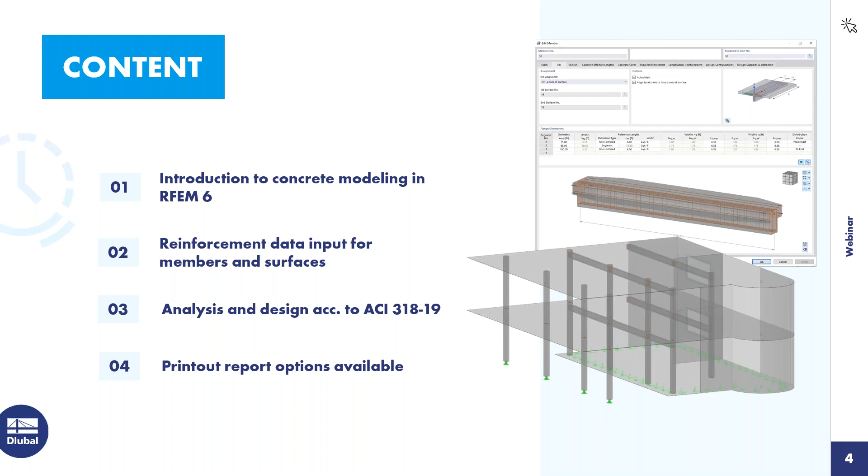As far as the content over the next hour today, we're going to move through a couple of examples, working in our new FEA program, RFEM 6, as well as utilizing the concrete design add-on. I'll give you a quick introduction to concrete modeling within our program. We'll take a look at reinforcement data input for both members and surfaces. We will be running an analysis and of course design according to the ACI 318. Finally, at the end, I'll show you a few printout report options available within the new program.

So we'll actually begin immediately within RFEM with our first example. When we begin a new file, we want to give it a model name. The type of model is set to 3D.

On the second tab, you'll notice all of our add-ons. These add-ons would only be available if you've purchased them, and today we'll be focusing on the concrete design. You can see I've activated it here.

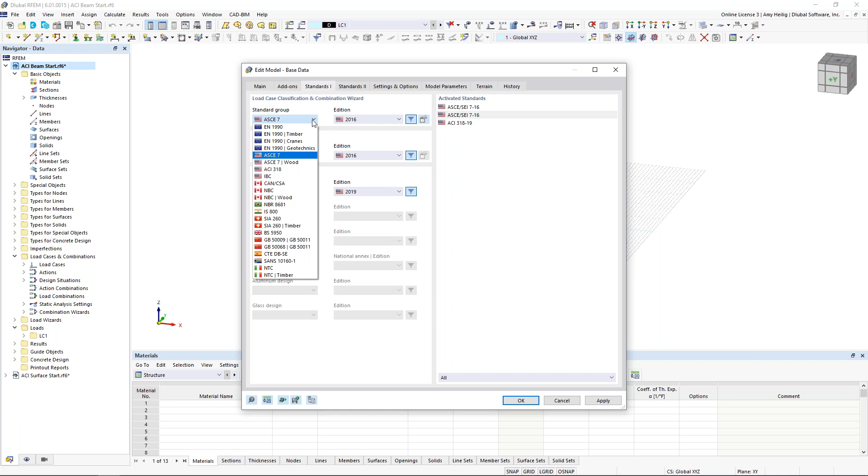Under the third tab, standards, this is where we can select the relevant concrete standard since we've activated that add-on. Today we'll be working with the ACI 318, but you can see the Canadian standard, the Eurocode, and other international standards are available. As far as our load cases and combinations, we'll be working with the ASCE 7, but of course we can use our drop-down to select a different standard there.

Finally, under the settings and options, this is where I can orient my global and local axes. You can see I've set both of these Z axes to upward for the model here.

Once we are done defining this basic information, we are brought into the main program RFEM here. We want to start off with our drawing grid, which we can right click at the grid down at the bottom to edit. You can see that I have my grid point spacing set at 1 foot. If you have anything else here, you can either reset it or choose this option, default, which will move it back to 1 foot spacing.

We want to begin by defining a new material here. So we will right click within our navigator under the material to create a new material. This will bring open our dialog box within the program.

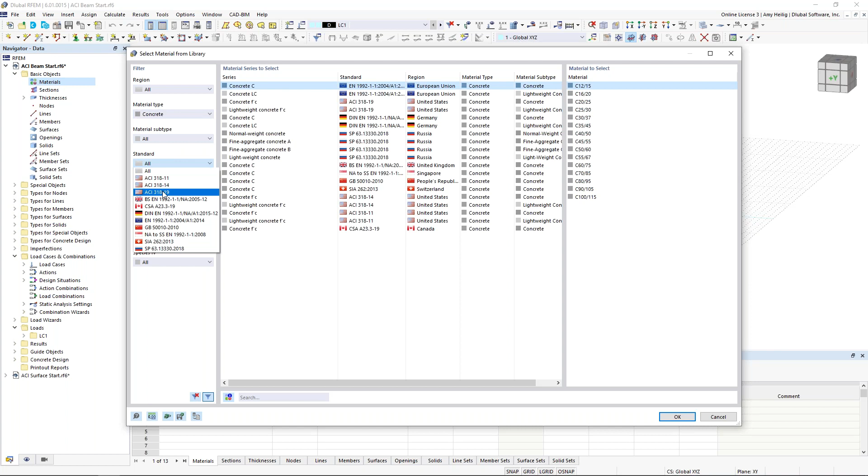We can then access our material database and take advantage of the filters over on the left. Within my drop down, I can choose concrete, select the standard ACI 318 2019, and from here choose my 4000 PSI concrete.

Notice on the second tab here with this concrete material, we also have the settings for creep and shrinkage. This comes into play a little bit later on with the serviceability design for long-term deflection if we wanted to consider that. We'll go ahead and leave this unchecked for our example today.

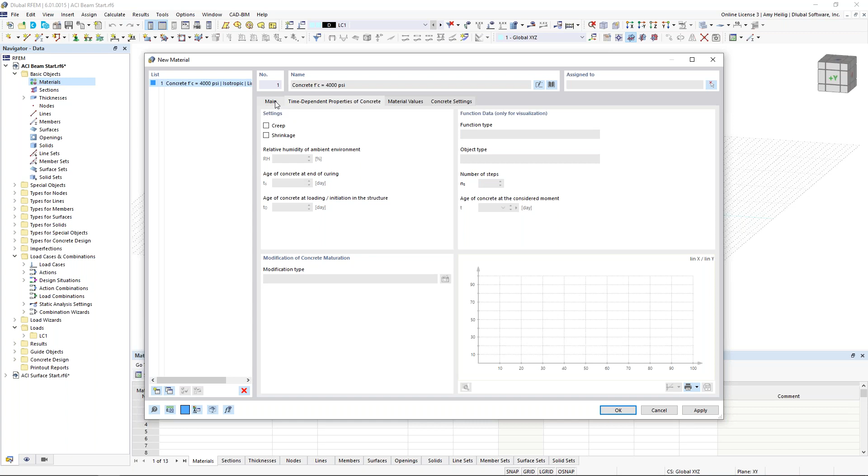Now, while we're still in this dialog box, we want to create a second material. So we once again visit our material database, and over on the left, we use our filters to reinforcing steel. Again selecting the ACI 318, we can now choose grade 60. This is a little bit different in RFEM 6 than what we saw previously in RFEM 5, where we do want to go ahead and define that reinforcing material here for our concrete elements.

Once those materials are defined, we'll see them over here within the navigator tree. Now we want to do the same thing for our first cross section.

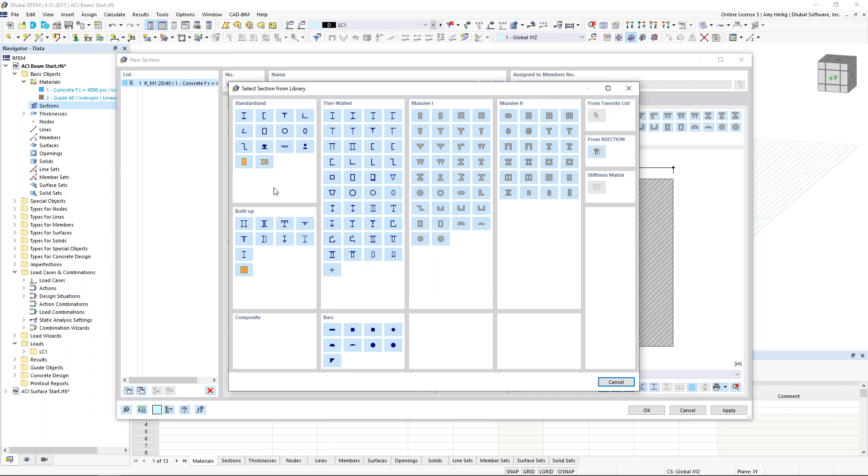So I can right click on the section here and choose new section. We'll see some of the various massive shapes available to us on the right. We can always visit our database to choose from the library the various thin-walled and massive cross sections. We also have all of the available sections from the steel standards, aluminum, and so on.

But sticking with this basic rectangular section, under the second tab here is where we can go ahead and modify these dimensions at 12 by 18. The third tab will calculate all of the cross-section properties for us automatically.

So we click OK, and now this section is available to us, and we want to begin by drawing our first member. I can go up here to my toolbar to draw a new single member. What you'll see here is the member type is set to beam. Now notice the design properties is automatically checked on here.

This is all related to that concrete design add-on that we activated within the base data. When we have this unchecked, notice all of these tabs disappear up here at the top related to our reinforcement. We will only perform an analysis if this option is not checked. But of course, we're also interested in the design portion for our example today, so we'll go ahead and leave this turned on.

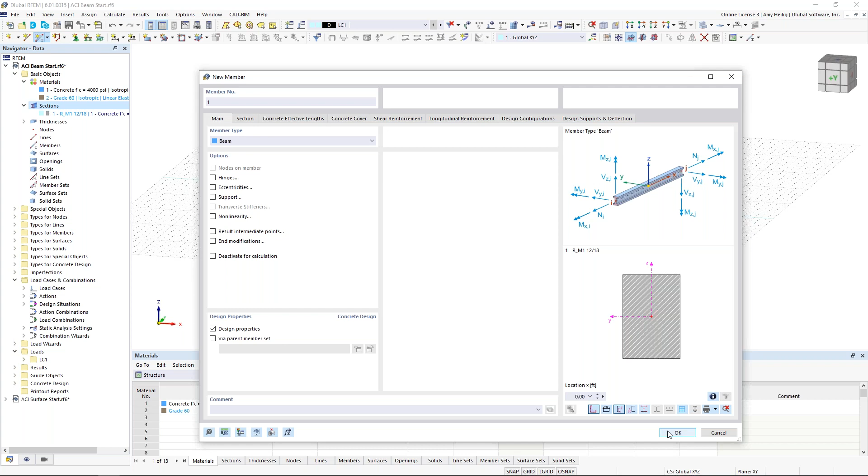We'll get back to some of these various tabs here in just a minute, but starting with the basic geometry, I'm going to snap from my point 0,0,0, and my second point will be at 26,0,0. So we have our first beam element shown here.

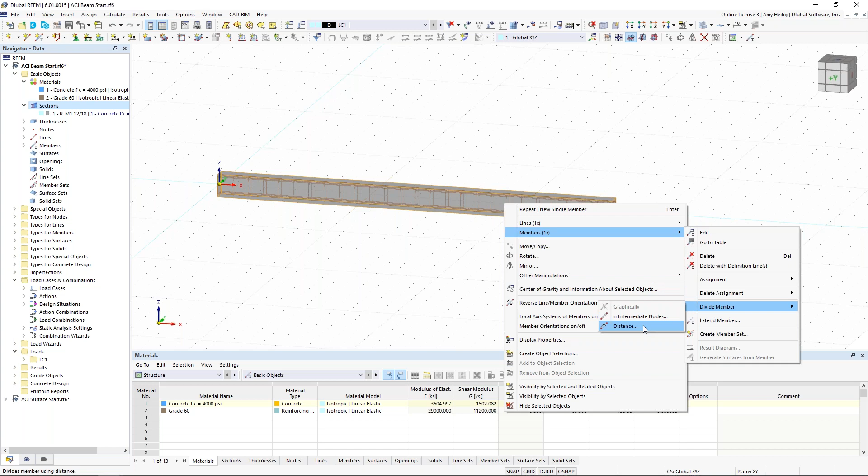Now I want to add a node along the member length here. So I'll right click on the member, and under members we have the option to divide the member by a distance. Within this dialog box, I can tell the program to go ahead and place that intermediate node 20 feet from the member start. But rather than dividing the member itself, I can choose this option to actually create the node without dividing it, so it will remain one continuous segment.

I click OK. I can turn this into wireframe view, maybe turn off my grid. I can zoom in here and you'll see this node added along the member length.

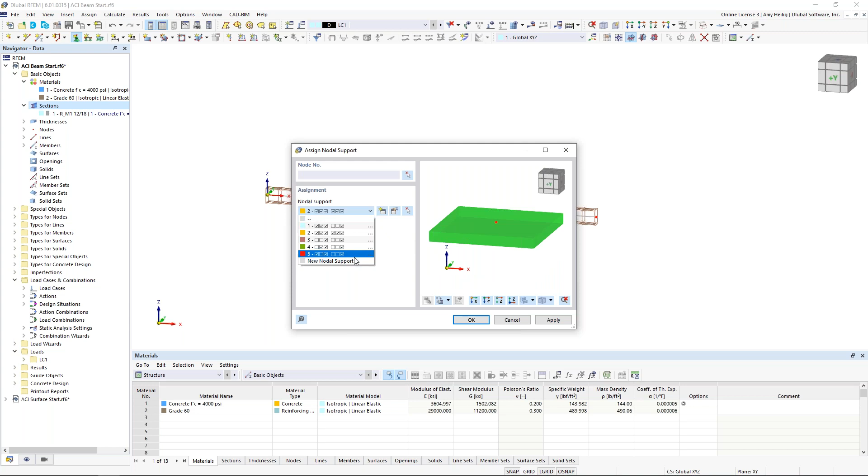So let us continue on by supporting this simple beam. We'll go up to draw a new nodal support. We have some default options within the program here, such as a typical pin support, maybe a typical rigid. We can also create a new support definition. Within this dialog box, we have our 6 degrees of freedom, 3 in translation, 3 in rotation.

Now we also have partial fixity. So if we have something that's not fully fixed, not fully released, we can go ahead and define that spring constant there. And lastly, because RFEM is a nonlinear program, we can define these geometric nonlinearities for the nodal supports within our third drop-down box here.

For our first nodal support, we want to restrain the rotation about the global x-axis, which I can see back here in the background. I click OK for that first definition type, and then I can graphically select my node here, node number 1. Now notice I'm still within this dialog box. I can click Apply and create a new nodal definition once more.

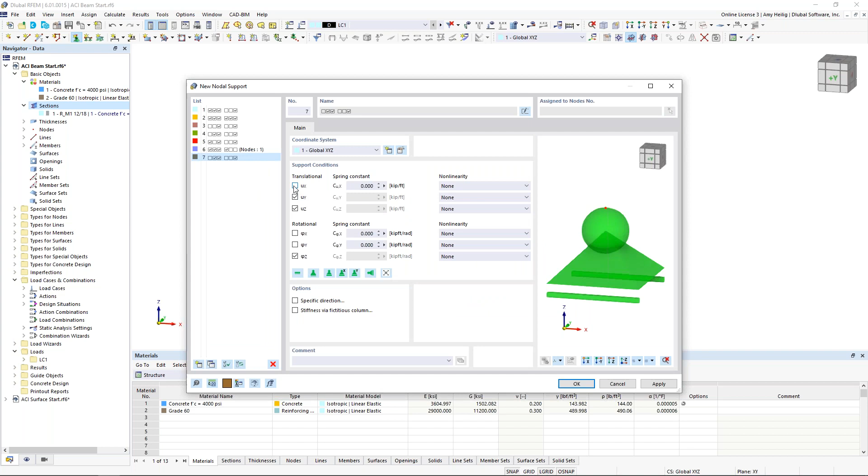This time we're going to release the translation in the global x direction for a roller. I click OK. I can graphically select my intermediate node here, and I click OK once again, and now our nodal supports are shown here at both these nodes.

Now, something new that we've added within RFEM 6, you can always right-click at one of these nodes and take advantage of this slider option to increase or decrease the size of those nodal supports.

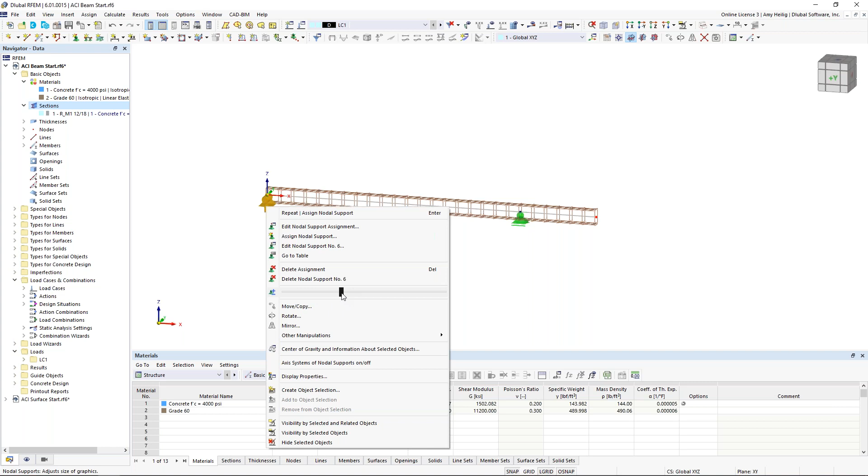Okay, so now that we have the basic geometry defined, let us move on to loading. Notice the program has already created one default load case here. So if we go into this option, Edit Active Load Case, we can go ahead and rename the load case dead. Now the self-weight is automatically activated here. The action category is set according to the ASCE 7 to dead load.

So for our second load case, we will create this as live 1. The action category will be set to live. The self-weight will be automatically unchecked here because we don't want to account for it twice.

And finally, for my third load case, I'll make a copy and simply rename this one Live 2. So now that all 3 of our load cases are defined, I want to take a step back here.

Under the first tab, Base, we will generate those load combinations automatically according to ASCE 7. This is what we set under our base data, but we can go ahead and make a change to a different standard here. I also like to activate this option, the combination names according to the action category.

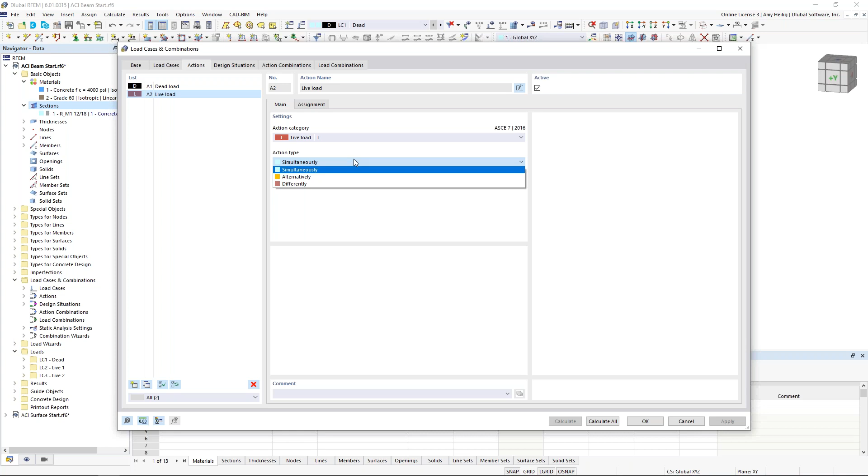Under the actions, we have both dead load and live load defined. Because we have 2 live loads under our load cases, we need to tell the program how to combine these within the load combinations, whether that's together, separately, or alternatively. We can choose those options from the drop-down box here.

Then we have our design situations, and this is new within RFEM 6. We have 2 design situations created, and these will be used for our concrete design. Notice we have LRFD for our factored load combinations and ASD for our unfactored load combinations. Both of them are active here for the concrete design add-on.

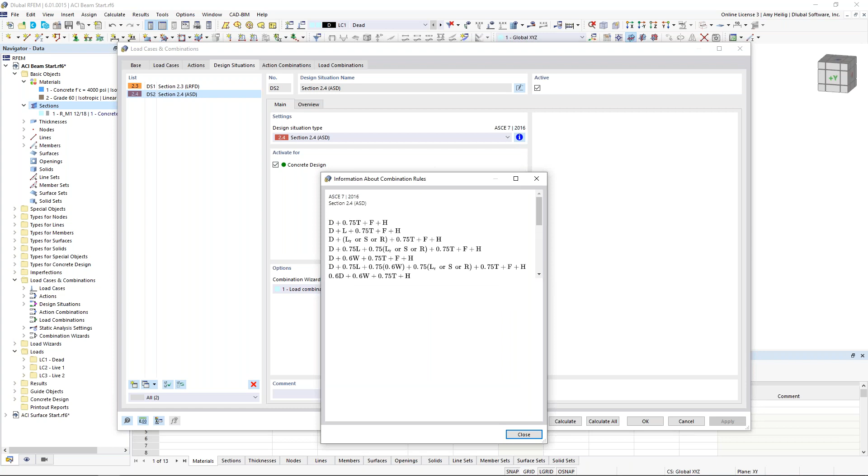Now, if we're curious to see what these load combinations look like, referencing the standard, we can click on this little info button here, and now we can see all of the load combinations in detail. But there's something we also need to take care of within this combination wizard that's important for concrete design.

For our factored load combinations, which will eventually be used for our strength limit state design, we know that we need to apply this I-crack factor that comes directly from the standard to reduce the stiffness. And that's all done here within the combination wizard.

So I can go to the edit settings here, and notice the static analysis settings is set to a second order analysis with P-delta considered, which is great. That's exactly what we're going to be utilizing today. But we also want to turn on this option down here to consider the structure modification.

Now I need to create a new structure modification. I'll activate this for members since I only have one member in my simple model. Within my tab that appears here, I need to use the drop-down box to create a new member stiffness modification. And sure enough, within this drop-down box, we see the ACI 318 Table 6.6.3.1.1(a) listed.

This is just going to reference the code to give you the I-crack factors for the various component types here. For today, we obviously have a beam. So the I-crack factor of 0.35 will be applied to the bending stiffness here.

I can click OK here, and then I'm going to want to either type in my member number or I can graphically select it. I click OK, and now for my factored load combinations, the I-crack factor will automatically be considered.

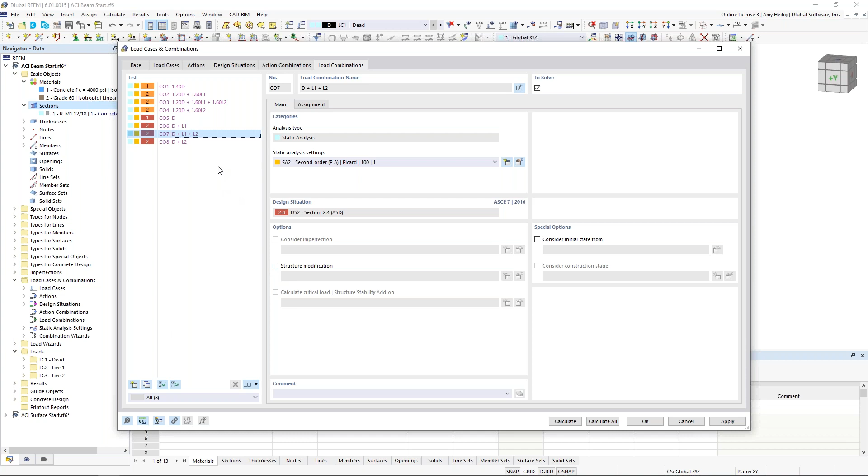So now that we have defined the load cases and combinations, we need to actually apply the load to the member. We'll start off with a new member load within our toolbar here. The program asks us which load case to place this member load under. We'll choose dead load, and up pops our dialog box where we can simply define the load magnitude of negative 1.0 kip per foot.

This load will be applied along the full length of the member. I can graphically choose this member or type in member number 1. I hit apply and next, and notice in the background that the load was applied, but I'm still within this dialog box.

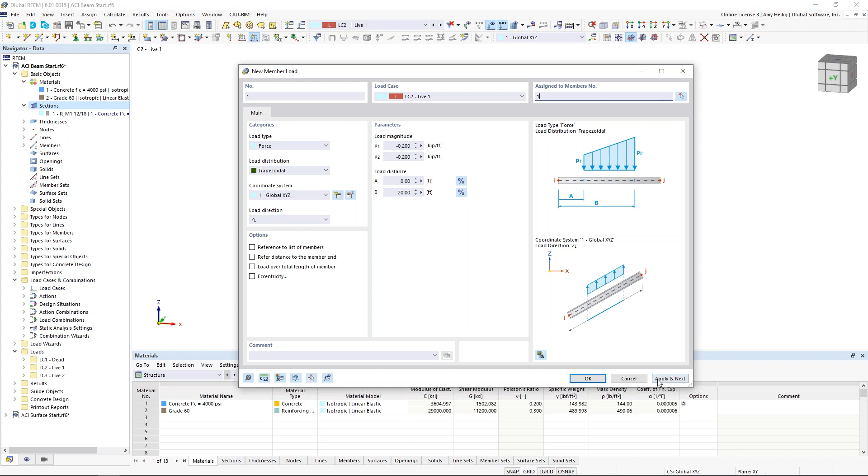This allows me to drop down to load case number 2. I'm going to change the load distribution here to trapezoidal, and adjust my load magnitude at the start to negative 0.2. The end will also be negative 0.2, but I want to apply this only from point 0 to 20 feet on my beam. I'll type in member number 1, apply and next, and in the background we should see that live load applied only between our 2 nodal supports.

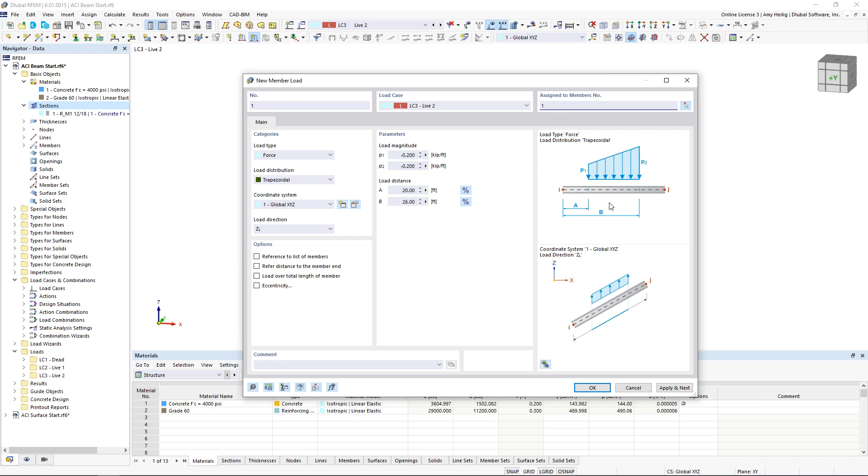Finally, we want to do the same thing with load case number 3. We'll leave the load magnitude the same, but adjust this to go from 20 feet to 26 feet. I'll hit member number 1 on the keyboard, click OK, and now we should see that additional live load defined here.

Now within my drop-down box, I have the ability to cycle through these different load cases and combinations to view the loads applied to my beam, also including the load factors from the ASCE 7.

Okay, so what we can do now is choose this LRFD design situation, and I can run a quick analysis. Remember, I haven't modified my reinforcement yet, so I'm not really doing the design according to the ACI quite yet. The program put in some default reinforcement to begin with.

Looking at just these static analysis results, notice we have a new tab here within our navigator, grayed out because it's the only thing we've solved for, but it says static analysis. We're probably not so interested in the global deformations for these factored load combinations, but what we can take a look at are topics like internal forces.

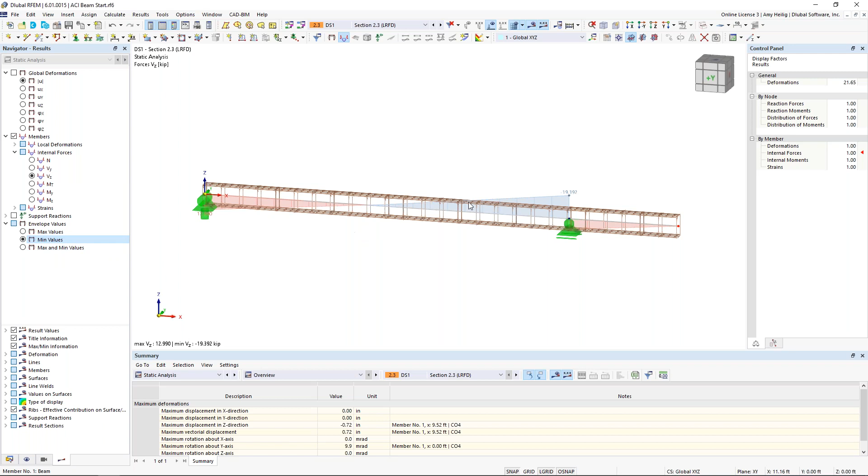You can think of these design situations as an envelope solution. It's going to group together all of those factored load combinations, and you'll see 2 different values for all of my internal forces - these just refer to the envelope values. Currently I'm viewing both the max and min, but I can set this to only the max or only the min, and we'll see that adjust here graphically.

We also can display, of course, the support reactions. Again, these are just the internal forces - this is probably what we'd want to use to do our design according to the ACI.

So moving on to that topic, let us double click on this member to explore these other tabs located up here at the top for our reinforcement definition. The first tab is the concrete effective lengths.

I'm not going to touch anything within this tab. The reason is because when we do not do anything within this tab, it's going to design the member according to a P-delta analysis. That is one of the approved methods within the ACI standard.

Now, alternatively, if I do define an effective length within this drop-down box, it will design according to the moment magnification method. Again, this is also from Chapter 6, an approved method. But we'll go ahead and design according to P-delta today. Under our concrete cover, we can leave this as 1.5 inches, which is default here.

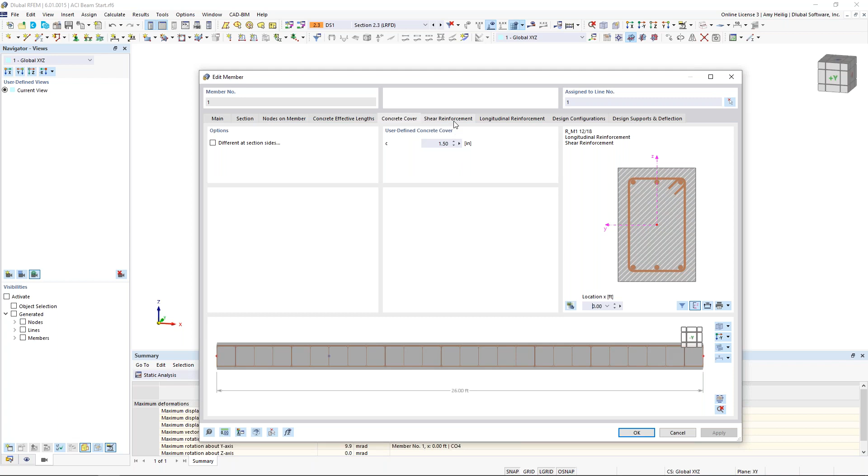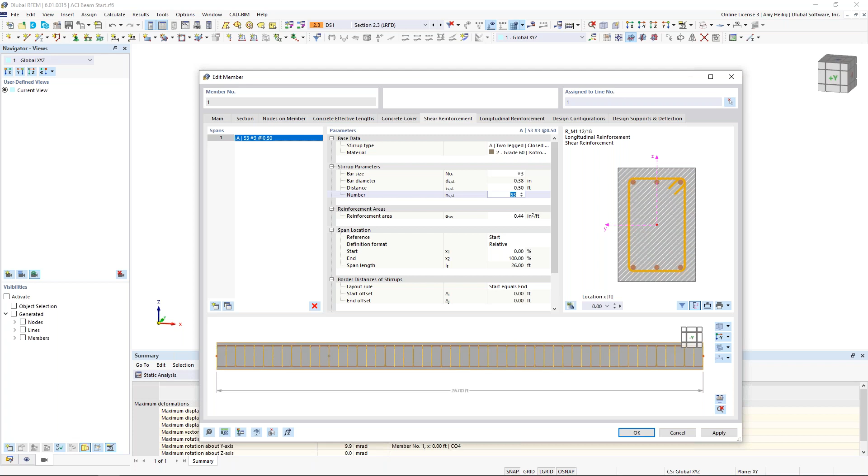Our shear reinforcement - this allows me to define different zones if I want along the member length. Notice I can create these different zones and adjust my shear reinforcement as needed. For our example today, we'll just go ahead and utilize these number 3s, but I'm going to modify my spacing at 0.5 feet, or every 6 inches. Notice this picture down here automatically updates with my shear reinforcement. This is applied along the full member length.

Under my longitudinal reinforcement, this is where I'm going to set the longitudinal reinforcement as shown over here in this graphic, this cross section. I can go ahead and use my drop-down box to choose unsymmetrical. This option gives me the ability to define 2 number 5 bars at the top of my beam - we can see that picture update here.

Along the sides, I'd like to define 1 number 4. Again, seeing those lateral bars here, go ahead and update in the picture.

And then finally, we want to update the bottom. We'll go ahead and choose 5 number 5s from my drop-down box here, and we see those 5 number 5s shown within the cross section. So this is going to be applied along the full length of the member here.

What else we can do is define a little bit more information such as reinforcement offset, but also anchorage type at the start and member end. This is all going to come into play for our development length design checks within the ACI, so we can make adjustments there. For now, I'll just leave this empty.

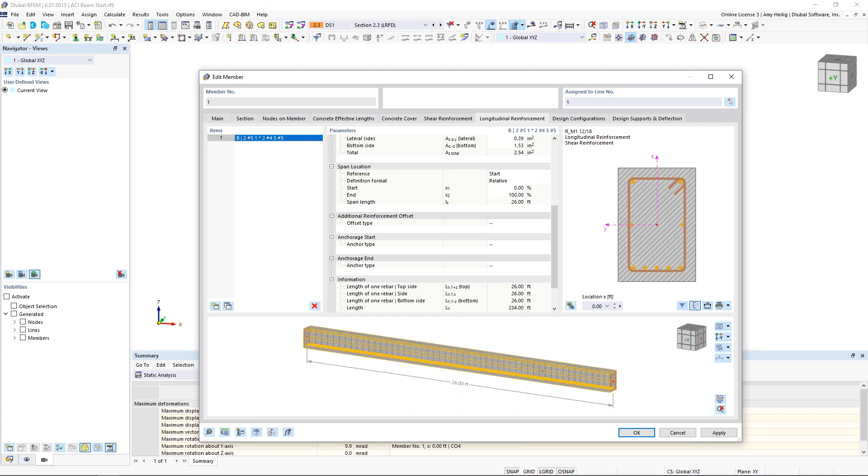Now, we of course have some additional positive bending moment in between these 2 supports. So perhaps this reinforcement isn't completely adequate, and we'd like to add some additional bottom reinforcement only at this location. So what we can do here is create a new item.

Up at the top, I'm going to choose from my drop-down box here the option D line. Then I'm going to choose 4 number 6s. Then I want to adjust my offset distance, which is all measured directly from the stirrup. We can go ahead and modify this at 0 and 1.7. And then for the right-hand side of this line reinforcement, it will be 0 and 1.7 again.

Okay, so now we see that additional reinforcement, but right now it's shown along the entire length of the member. I'm going to actually modify this to begin at 3 feet and end at 17 feet. And now we can see the reinforcement shown here, which will coincide in between the two nodal supports.

Now, similarly, we probably have a negative bending moment over this intermediate support here and into the cantilever portion. So we'd like to add some additional reinforcement for the top of our member. Let us once again define here the option D for line, and we're going to choose 2 number 5s.

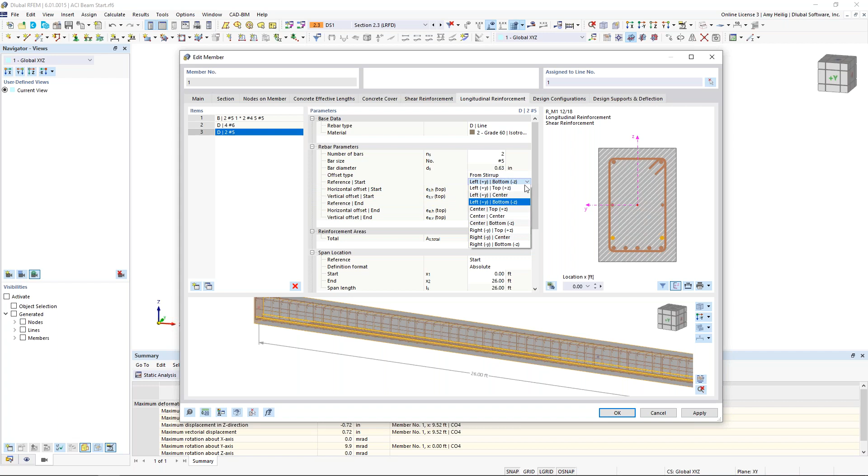Now, for this option with our offset distance, we want to use the drop-down box here to choose center, top, positive Z. Then I'm going to modify my offset distance to negative 1.2 and 0. I'm going to choose the same option here, center, top, positive Z, and this is going to be 1.2 and 0. So now we can see that additional reinforcement at the top shown here.

Now we don't want to run this along the entire member length. Rather, we are going to choose a distance here of 17 feet to 25.5. And now we have the additional top reinforcement defined over that intermediate support. So that will be all that's needed for this particular tab.

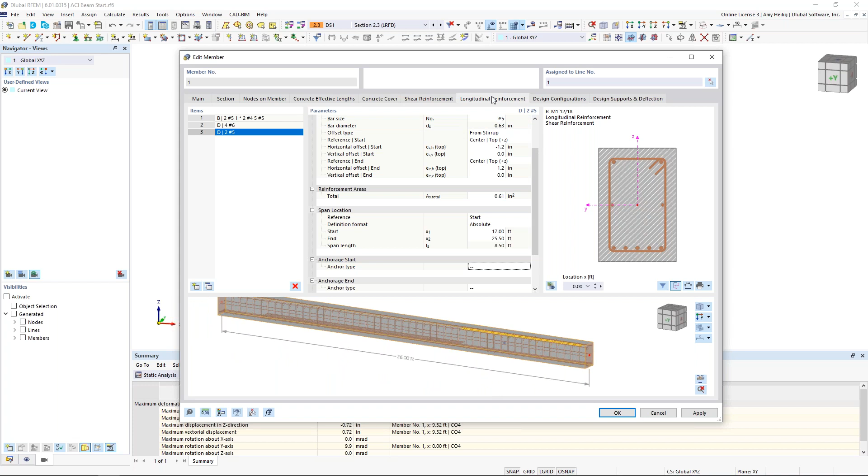So we'll move on to design configuration. We have strength configuration and serviceability, both with a default option. We can go ahead and edit the settings for this default. What you're going to see here are just the various options specifically for the ACI on what we can turn on and off for the strength limit state. For example, we have strength reduction factors, some minimums and maximums to consider directly from the standard. Now the stability tab here is related to the moment magnification method. We're not running that for today, so nothing to take care of here.

As far as the serviceability configurations, if we take a look at this, you'll notice initially we're going to be checking the crack analysis. So what this is going to allow us to do is take into consideration section 24.3.2 from the ACI to make sure that our spacing of our longitudinal reinforcement meets the code requirements.

Now, additionally, we can turn on the direct crack width calculation. This is a bit more of a theoretical approach. It will utilize the Gergely-Lutz equation to calculate the crack width. We can compare this to the reasonable crack widths set forth by the ACI PRC 224.

So directly from that standard, we have some different options here that allow us to choose our limiting crack width. For example, dry air protective membrane, we can set this to 0.016 inches. Some minimum longitudinal reinforcement due to shrinkage and temperature.

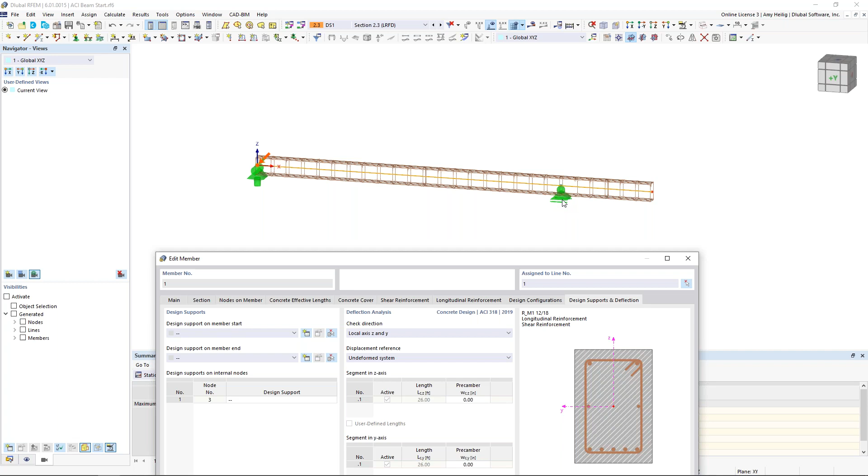Now the final tab is related to our design supports, and this is important for two different reasons. The first we'll start with is deflections. The program doesn't know which portion is supported on both ends and which end is a cantilever. So by defining these design supports, that gives the program the intelligence to recognize which limiting deflection ratio to compare the different segments to.

What we'll begin with is a new design support at the left-hand side. So I create this new design support. You'll notice the type is set to concrete. We give it a support width of 16 inches. The support depth is just set to the width of the member. We have a nice picture over here on the right-hand side, just referencing what some of these settings are.

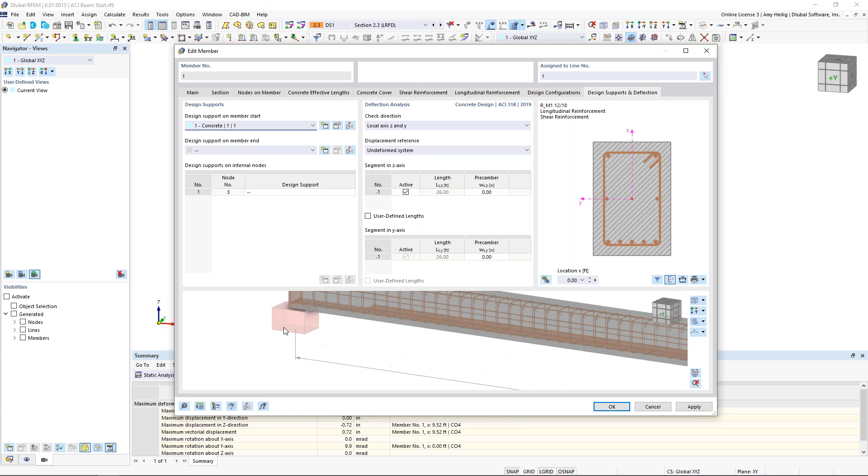Now we also have the ability here to reduce the moment, so we can set this factor for a moment redistribution over this support width. This is all related to ACI section 6.6.5. So when we create that support width, we can automatically see it set here on our first node of our beam.

Now we also want to set that design support on the intermediate node along the member length. We can do so here at node number 3 by either selecting the support we already defined, or we can create a new definition. This one will also be 16 inches in width, but I want to set my ratio here, maybe 0.75. I click OK, and now we can see that nice design support shown here.

So now the program will have the intelligence to recognize this is a cantilever portion out here on the right, and this portion here is supported on both sides. Now, if you do not set any design supports within this tab at all, the program automatically defaults to a support at the member start and the member end internally.

Now, these design supports are also important for a second reason, and this all has to do with strength design when we're talking about topics like taking the shear internal force a distance d away from the support face. Well, this will all be considered now with these design supports that we've defined. Otherwise, the program only knows the intelligence of taking the shear force, for example, a distance d away from the member start. The information over here on the right is just related to the serviceability deflection checks.

We can add in a pre-camber. We want to tell the program what is the reference length for our limiting deflection ratios, and that will sum up this particular tab here.

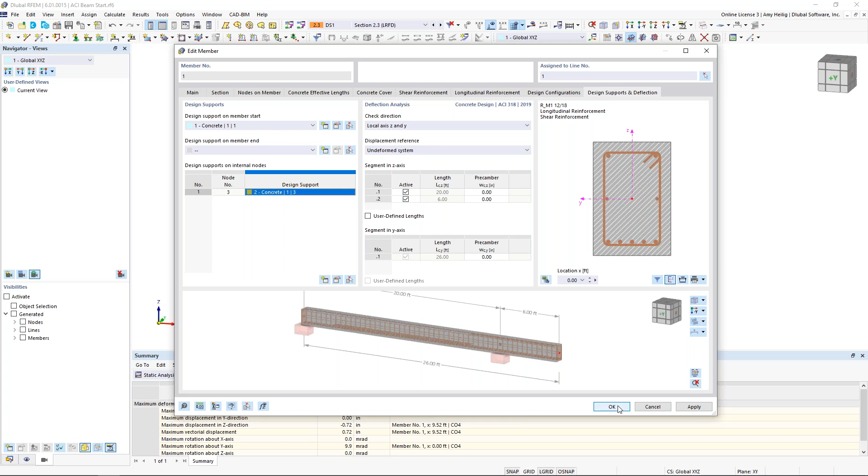Okay, so now that we have finished all of these various settings, notice that the program has automatically updated my reinforcement. We can see those design supports shown here, and we can now move on to the design utilizing the concrete add-on. So within my table down at the bottom, I'm going to activate the concrete design here. This is available because I have set this under the base data to turn on that concrete design add-on.

Under the first tab, here are my two design situations, LRFD and ASD. We need to tell the program to use the LRFD according to this drop-down box for strength design. Now we want to use the ASD, or unfactored load combinations, utilizing this drop-down box for serviceability design.

Now notice we also have an additional option here for seismic design. We could create a new design situation, we could select seismic design as well. Currently, this is only for reinforcement seismic detailing according to Chapter 18. So we're working on establishing some more features there in Chapter 18, but that will be coming in the near future. So for now, just looking at strength and serviceability.

Now the objects to design, we can see here we only have one element in the model, of course. The rest of these tabs are really just repetitive. It tells us our materials, our sections, so nothing to really do here. So we can begin by running our calculation directly within this table.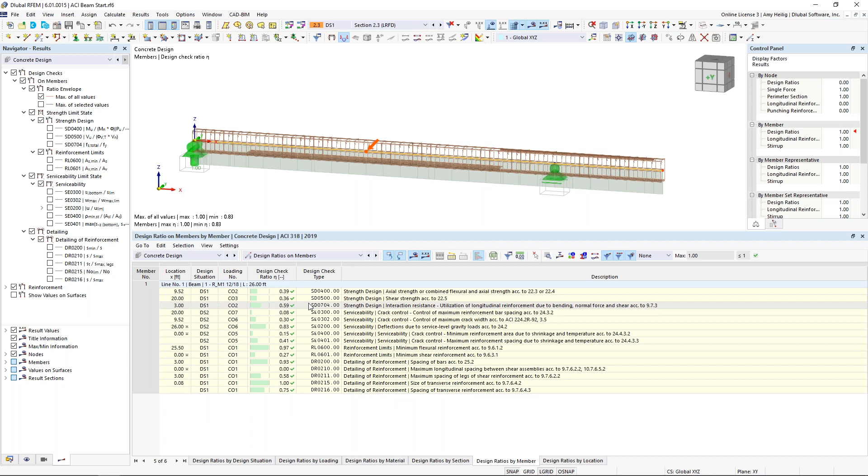So we're still within this concrete design add-on, and now within the drop-down box, I can look at my design ratios on my members. They're grouped together quite nicely, showing the strength design, serviceability, reinforcing limits, and detailing of the reinforcement. All of the design ratios here are green.

That's always a good sign rather than seeing red, which means we're over the design ratio of 1.0. We can also utilize these factors or filters up here at the top. If we want to view only the max ratio, we can select that here; otherwise, all of them will be shown. Notice as I click through this, the big red arrow in this graphical interface will determine where my controlling internal force is.

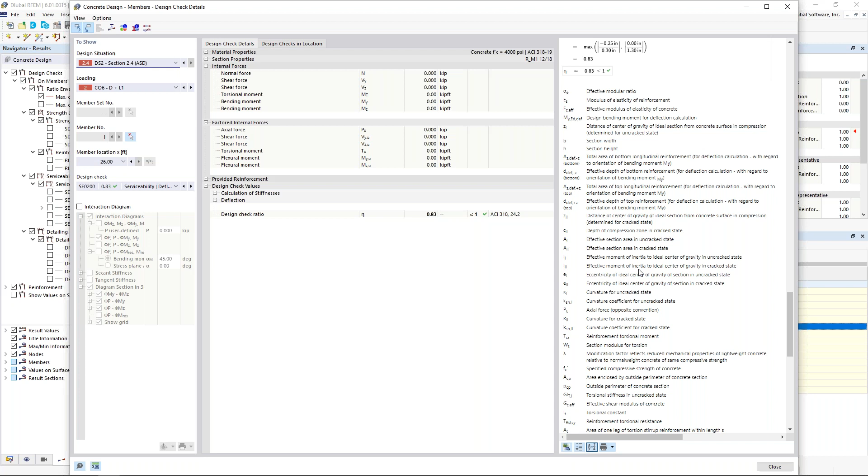The other new thing within RFEM 6, for any one of these design ratio checks, is that I can visit my design check details. This launches a dialog box that shows all of my code equations. Notice this one is pretty long and complex, but we show every single equation. Down at the bottom, we give you every variable definition, and we're also giving you all of the code references along the side.

So we can use any one of these checks here. Currently we're looking at serviceability. We can take a look at any one of these other checks to determine the ratio for our various serviceability checks. Alternatively, we can take a look at any one of the strength design checks as well. Same concept—we're going to see all of those variables listed again with all of the code references.

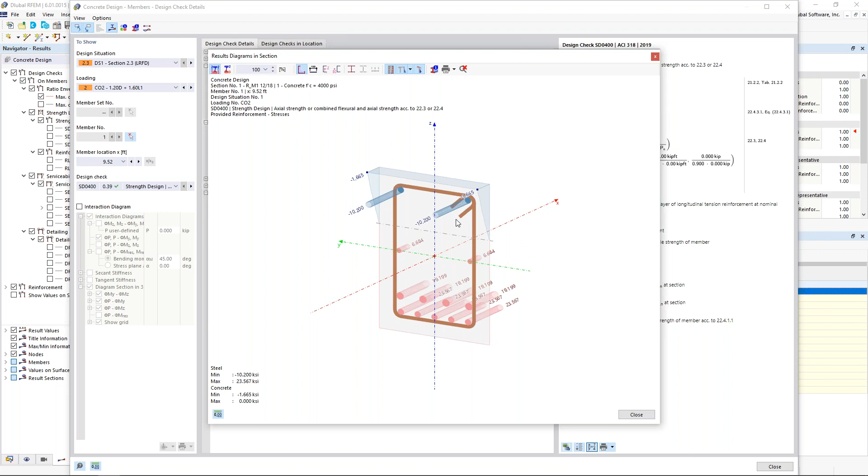What else is pretty powerful is we can view the diagram in section. This shows me which portions of this concrete section are in compression, which are in tension, and we're also giving you the stresses for each of the rebar here.

So this information is all available to us in our table format, but now we have this new drop-down here for concrete design. We can see, if we collapse these trees, that we have two options: the design checks or the reinforcement. Let us take a look at the design checks first.

I can turn off my reinforcement on my member by visiting my navigator display options. Here we'll see types for concrete design, and I can turn off my member reinforcement. Going back to my member design check results, I can turn off maybe the max ratio and turn on any of the various checks related to my color coding here, which all relate back to the table design ratios.

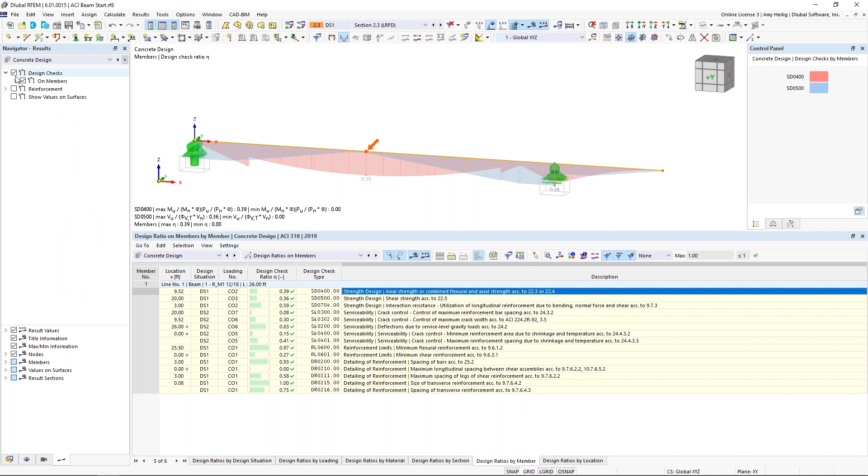Now, in addition to viewing the design checks, we also can take a look at the reinforcement along the member. What I mean by this is we can view the required reinforcement at the bottom of the member—this is strictly from the analysis. On top of this, we can overlay the provided reinforcement on the bottom.

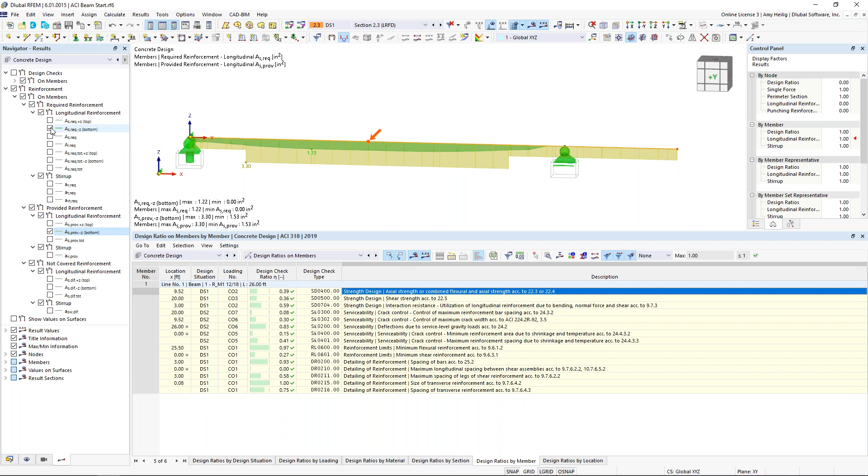So what we would always hope to see, of course, is that the provided reinforcement is greater than the required reinforcement. In a similar fashion, we can turn on the required reinforcement for the top, which makes sense—we see it over here along the support and into the cantilever. What we can do is overlay the provided reinforcement at the top, and again, this is greater than the required.

So some various options there in terms of how to graphically view these concrete design results, both in table format as well as within the graphical options. That will go ahead and wrap up our first example here. I wanted to give you an introduction to just a simple beam design.

For our second example, let us move into a little bit more of a complex structure. Now we have an entire building here, with columns, beams, walls, and slabs all defined with reinforced concrete. The first thing I want to do here is note I've already loaded and set up the load combinations, taking care of a lot of this information that we just did with example 1. Let us go into our design situations that we already covered.

So again, we have LRFD and ASD, and as we mentioned before, we need to set those I-crack factors for our factored load combinations for the strength design. Well, I went ahead and did so.

I want to show you how this differs a bit when looking at the structure modification here. Notice I've activated both members and surfaces. We have two tabs at the top, and I have set the I-crack factor for my columns, selecting all the column members. I also see my beams, and I've selected all my beam members.

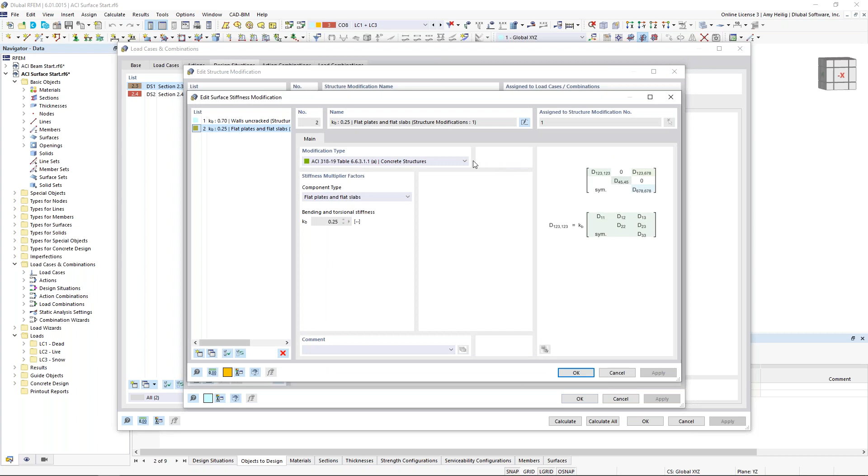Under my surfaces, we have set the I-crack factor according to the ACI for walls uncracked and flat plates and flat slabs. Just to go into these detail settings, in a similar manner we have the Canadian standard here. It's the same concept for designing according to the CSA standard, so that option is also available.

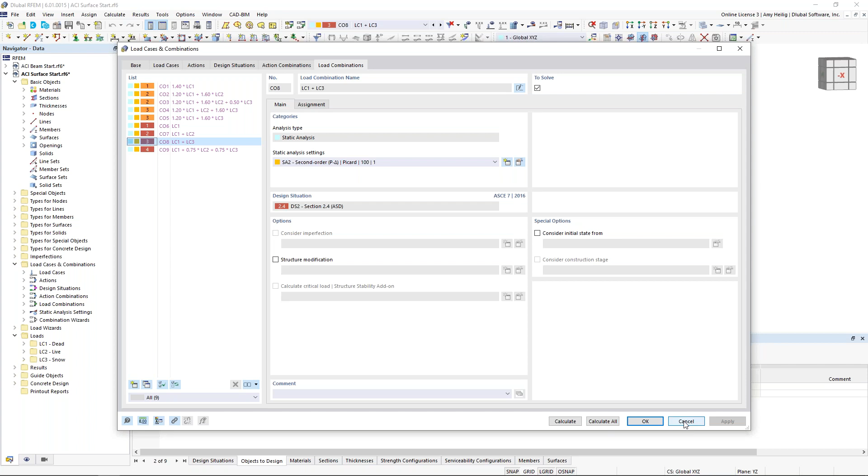Now that we have defined these structure modifications for our factored load combinations, I created an additional combination wizard for my unfactored load combinations, which should not have any stiffness reductions. So we'll see that reflected here within our load combinations, just like what we saw with example 1, but now we have many more elements.

Let us begin with the reinforcement definition for our first surface. We'll choose this slab located here in the center. I will create a visibility by the selected objects. I'm also going to right click on this surface and turn on the local axis system, and turn this to wireframe view as well.

The local axes are important for the reinforcement directions, which we'll see in just a minute. So I wanted to go ahead and set us up for that. All we need to do is double click on the surface here.

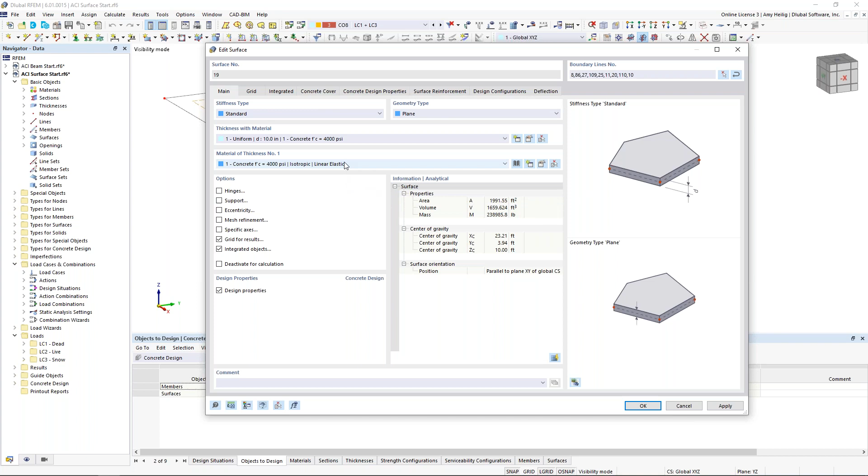Just like with the members, with this design properties turned off, which is the case with every single element within this model right now, we're only running the analysis. But when I activate the design properties, we see all of our additional tabs here where we can define our reinforcement for the design. So let us move to the concrete cover.

Okay, now the concrete design properties. This is going to be where we set our reinforcement direction. And we have no reinforcement direction defined right now, so let's create a new one. The reinforcement direction is going to be related either to the local x-axis or the local y-axis of the surface. This is why I wanted to turn on the local axes, so you can understand how the reinforcement direction is influenced by this.

We'll begin with the local direction x for the top side as well as the bottom side. So if I bring this down again, we're utilizing the direction based on the local x-axis, and the transverse direction would be the local y-axis. Now, of course, you can rotate this too - it doesn't necessarily have to be in either one of those orthogonal directions.

For the surface reinforcement, we create a new definition here, and we're going to apply the reinforcement over the entire surface. My reinforcement material is already set at grade 60. The reinforcement type can be welded wire mesh - we have the library in there - it can be rebars or it can be stirrups.

Perhaps we want to define some additional shear reinforcement around our columns, for example. But we'll go ahead and utilize the rebar option, and we will choose number 5s at 12 inches on center, or 1 foot. Now, we also want to apply this in the transverse reinforcement direction. Notice right now it's only spanning one way. When we activate this, we want to choose number 5s, spanning 1 foot in the orthogonal direction here.

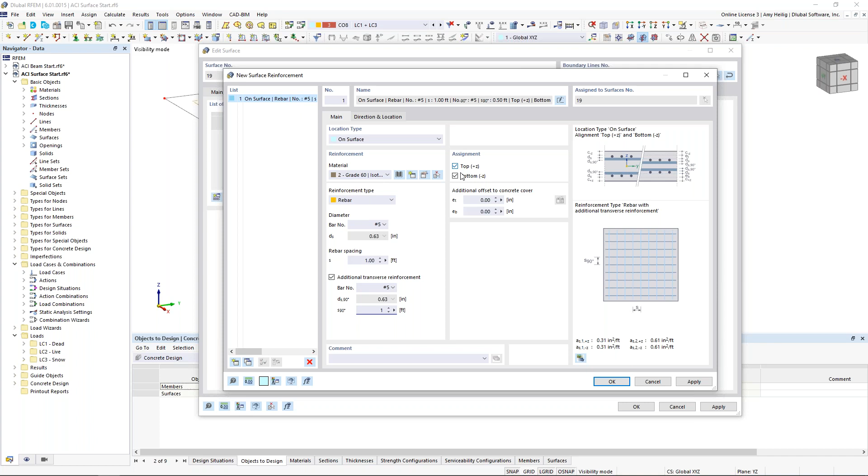So we see the picture update over here on the right. Now, we're applying this to both the top and bottom of the surface. So I've created this first definition type here, and we can see it populate here within our table.

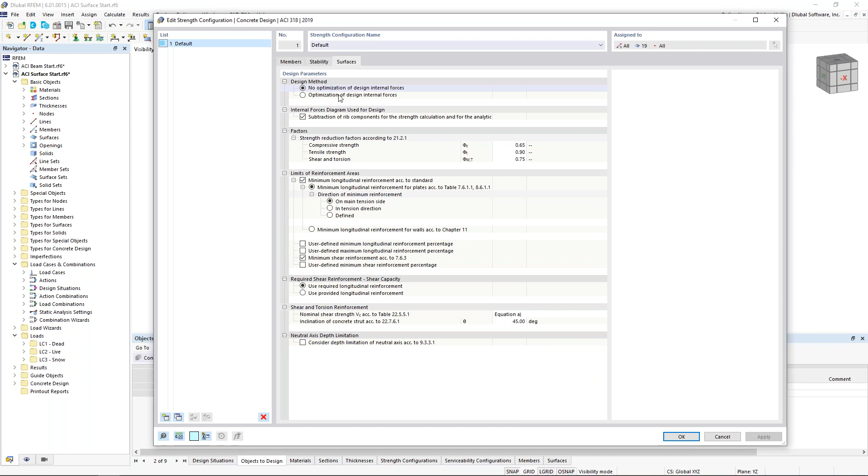Okay, so the design configurations - really the same concept here as what we just talked about with our first example. Just notice that we now have an additional tab here for surfaces, so various settings specific to the ACI for our strength limit state design. Serviceability, same concept we've already discussed within the previous example, but just know that we can check deflections for surfaces as well.

That limiting deflection ratio is still referenced here within this design configuration. Under the last tab, deflection, this is where we simply tell the program whether this surface is supported on both ends or is a cantilever. The reference length is determined by this dropdown, where we can use the maximum boundary line of the surface, the minimum boundary line, or manually set that length.

Now that we have defined our surface reinforcement, we can click OK and see this graphically update with our number 5s at 12 inches on center. If I right click and show the hidden objects in the background, we know we have these columns framing up into the slab here, so we're probably going to have some additional negative moment at these locations. Perhaps I'd like to add some additional top reinforcement, but only at these locations, not the entire surface.

If we take a look back at our navigator, we see the types for concrete design, and here's our surface reinforcement. That surface reinforcement, number 5s at 12 inches on center, is defined within this tree option. I can right click to create a new surface reinforcement, and this dialog box should look familiar, but this time we're going to choose the option free rectangular. Here we can define additional rebar, and I'm going to choose number 5s at 1 foot on center, and also define the transverse reinforcement, number 5s at 1 foot on center. I only want to apply this to the top of the surface, not the bottom.

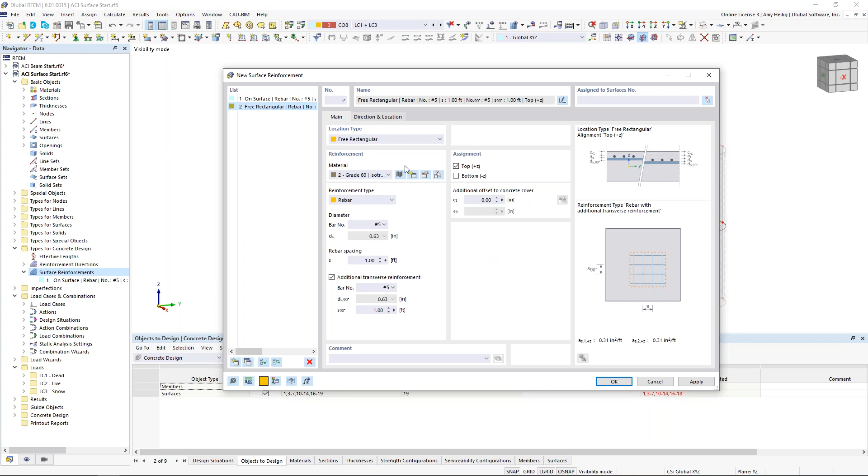In the direction and location tab, I'm going to choose the option center and sides of rectangle. This allows me to graphically choose my point here, and I'll choose the top of one of these columns, 18 and -11. I define the size of my rectangle, 6 feet by 6 feet, and then I can graphically choose the surface here I'd like to apply it to.

This picture represents the fact that we can actually project down this reinforcement over multiple levels. So if we have a multi-level story concrete structure, and we know that this same free surface reinforcement should be applied at every single level, we can define multiple surfaces here, and the program will automatically place that at every story level. Once we click OK, we should see that additional reinforcement here.

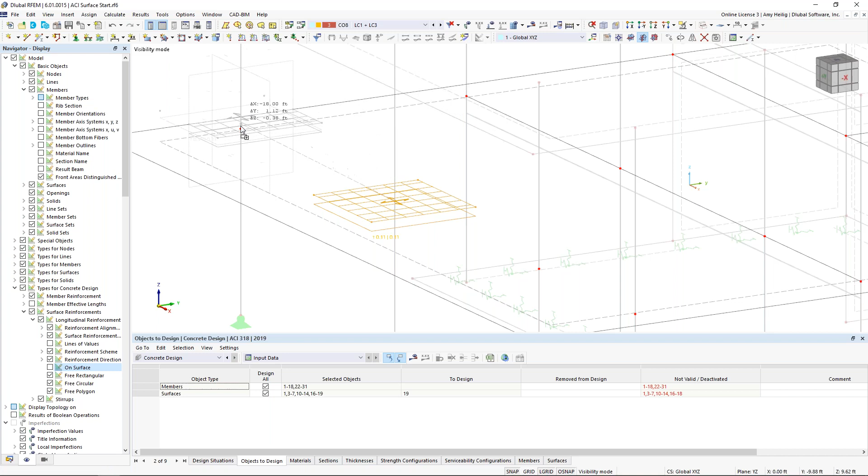Now, it might make a little bit more clear under our display navigator. I am going to turn off the surface reinforcement on the surface itself, so we only see this rectangular surface defined here. Additionally, I can select this, hold down my control key, and drag and drop it to different locations on my model that I know are going to have a little bit higher of a negative bending moment.

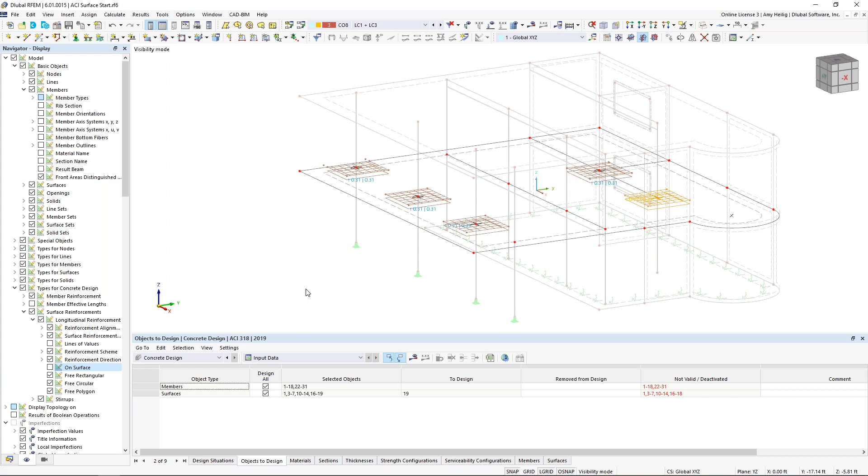I also have some areas back here where we kind of intersect with the walls and columns that need a little bit more reinforcement on the top. So of course we'd want to continue optimizing this best we can based on the internal forces. Again, we probably want to add some shear reinforcement and such to the slab. Now, taking you to another little side note, punching shear will be ready actually, hopefully, in several weeks for the ACI. It wasn't quite ready for this presentation, so we're not checking that right now, but that should be very close to being done within the program.

So once we have defined our surface reinforcement, we can actually begin the design. But before we do, I'd like to define a little bit more reinforcement for some of these other elements within the structure. So let me turn off the free rectangular, and I will turn off the local axes of the surfaces, and cancel this visibility mode and turn this back into the rendered building here. Notice we have these beam elements drop below the bottom of these slabs. Well, these are special members. If we double click on them, the member type is set to rib.

So what a rib element allows us to do is to actually design this as a T-beam, integrating it into the slab directly. So what we do is define the rib alignment on the -Z side of the surface. Now what's new within RFEM 6 is that we allow you to vary the effective width, or flange dimensions, along the length of the member.

Currently the default is just L/6 over the full length of the member. But what we can do here is change this to maybe 85%, modify this to the segment, and set this to L/8 instead. Now from 85 to 100%, I'm going to use my definition type here to user defined. We'll set this to 6 feet, and select L/8 once again. Notice that the effective width transitions clearly here at 85% to a smaller value.

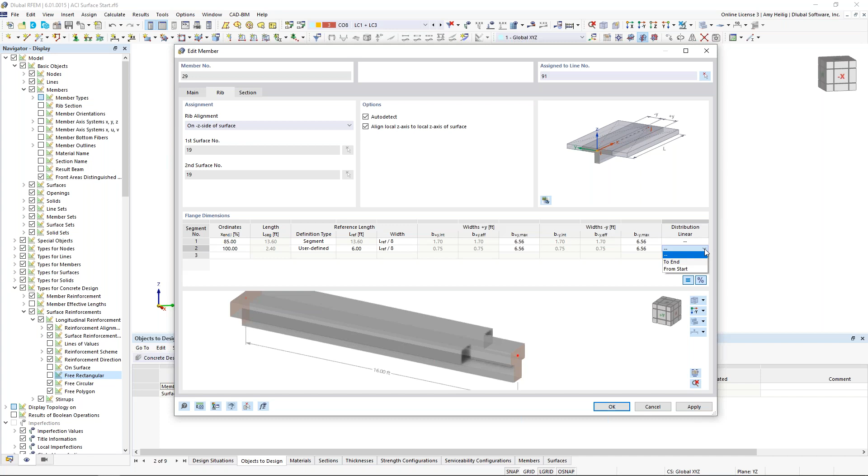Now what else is new is that we have this option within the distribution, linear column down here at the end, to linearly distribute this to the end. Notice at 85% to 100% we have a clear line transitioning back to the end of the member. This is all done as we approach the interior column here. So that effective width is set for that rib member.

Now I went ahead and did it for the rest of these members. You'll notice here for this particular rib section, if we zoom in, we have this linear distribution at both ends as it spans between these interior columns. Maybe up at the top though, we want to also utilize these rib options, but for these, I just set them without using that distribution option at the end. So we have a clear, distinct view here of where the effective width changes at 85%. Either is possible within the program.

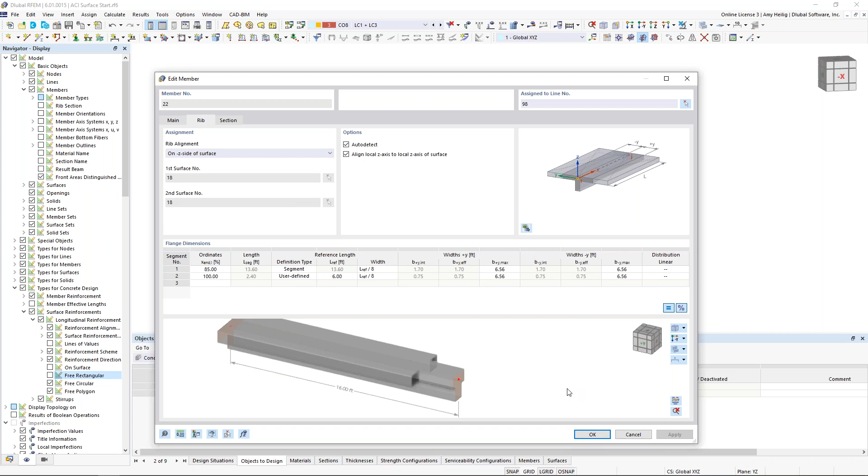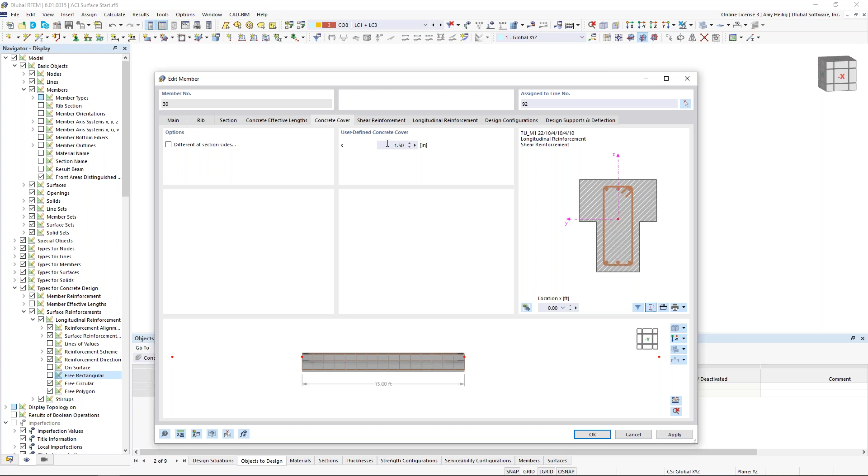So let us begin by designing this rib member here in the center of that lower level. Now remember, everything has been turned off for the design property, so we want to activate that now. We'll take a look at the concrete cover. Remember the effective lengths we leave empty - we're not designing according to the moment magnification method, but rather P delta. The concrete cover we will leave as default at 1.5 inches.

Now for my shear reinforcement, I actually want to have 3 different zones here. So I can zoom in, and for my first zone of shear reinforcement, we want to choose number 3s, but we'll have a tighter spacing here of 4 inches, or 0.33 feet. Now I want to modify the distance of this zone so that it's applied from 0 to 3 feet. Now we can see our picture update down here at the bottom.

My second zone is going to be number 3s, and we're going to modify this spacing to 0.5 feet or 6 inches. This will be applied from 3 feet to 12 feet. And finally, for our last zone, we want number 3s at 0.33 feet, so that's that 4 inches again. This will be applied from 12 to 15 feet. Again, everything is updated within this picture.

For the longitudinal reinforcement, notice we have some grayed out options here. Well, if I take a look along the length of the member, we can actually consider automatically the surface reinforcement. Remember those number 5s at 12 inches on center that we defined? You can see them displayed here in the effective widths, or the flanges. We can also turn this off and manually apply reinforcement as well, which is what we'll be doing today.

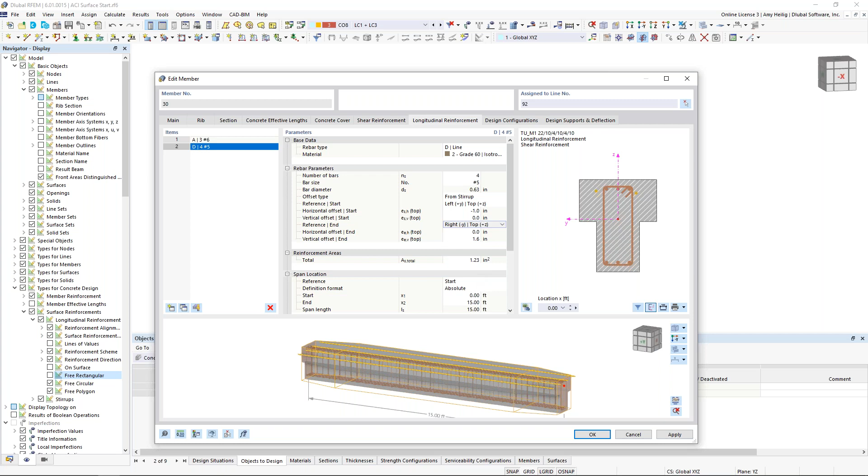This should be right negative Y, which we see here, but top positive Z. We want to go ahead and modify this one to a distance of 1 and 0. If we expand here on the distance to get a larger effective width for our flanges, this will make a bit more sense as we see our reinforcement on top. We definitely have to play around with this to get those offsets correct with the display options. This will also be applied along the full length of the member here.

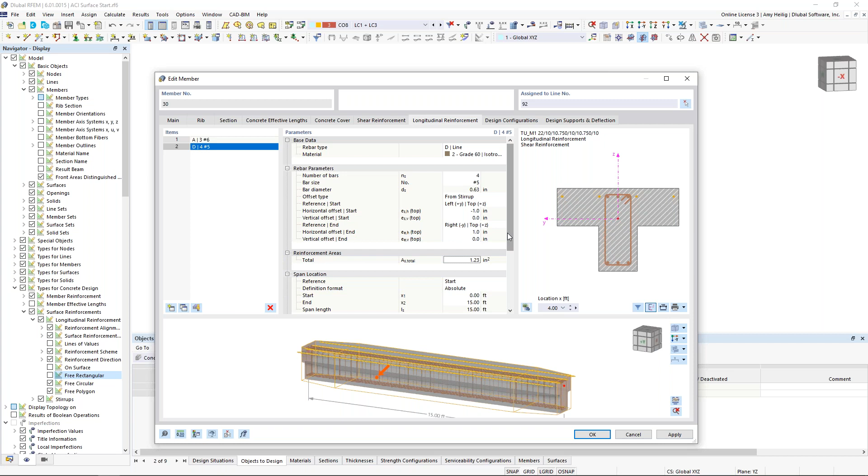Okay, so design configurations we've already covered. The design supports - again, if we do nothing within this particular tab, the program will just treat it as supported at both the member start and the member end. Perhaps we'd want to take into consideration the fact that this rib is framing into the column, so we'd want to set those design supports here. But for our example today, we'll go ahead and leave that empty.

Now we should see the reinforcement drawn graphically here within the model. Okay, the final thing to do is to set the reinforcement for some of the columns.

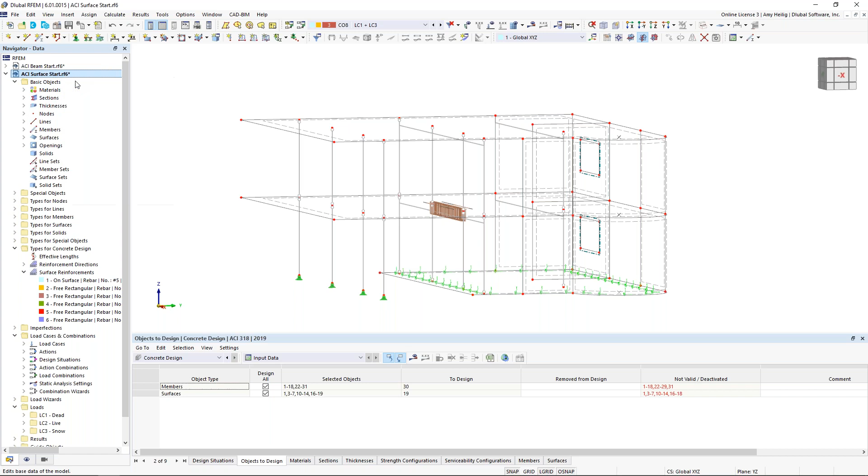For this, I want to go back to my navigator here, and I'm going to right click to visit that base data. So if you remember when we began our example, we can revisit this dialog box here. And under these settings and options, I can activate what's called member representatives. Up pops a new tab at the top, and what the program has the ability to do is group together members based on similar materials, sections, lengths, and so on.

I've also activated comments here. So what we'll see when we click OK is a general color coding of all of those elements grouped together that have those similarities.

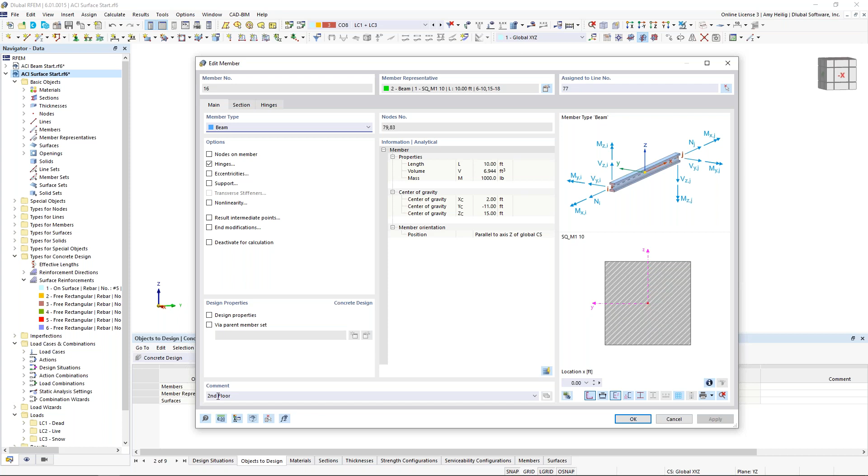Now, the columns at the first floor are actually identical to the columns at the second floor, so how I differentiated them is just to type in this comment down here at the bottom for those members, second floor, and then automatically the program will place them into a different member representative group. We can see this denoted by this green color. So what I can do is double click on the green color itself, and up pops all of our member representatives.

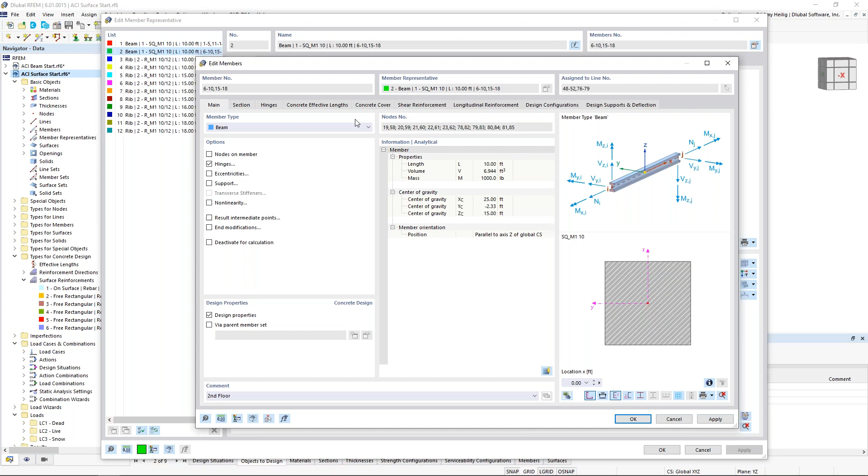So we'd like to define the reinforcement for the columns. Currently members are listed here, and I'm going to go into the edit settings. I have the design properties turned off, so we're going to turn those on. Now, I'm not going to define the reinforcement here because if I do so, I'm actually defining that individually for each member. Rather, when I click OK, you'll notice that I'm still within the member representatives, but now I have the exact same tabs available to me here.

Why this is beneficial: if I go into my member representatives and make a quick change to the reinforcement, that's going to update all of my members that are grouped together.

So once again, we will visit the concrete cover, 1.5 inches, the shear reinforcement. We want to modify this here, so we'll go ahead and change the spacing to every 6 inches, 0.5 feet. We see our picture update here.

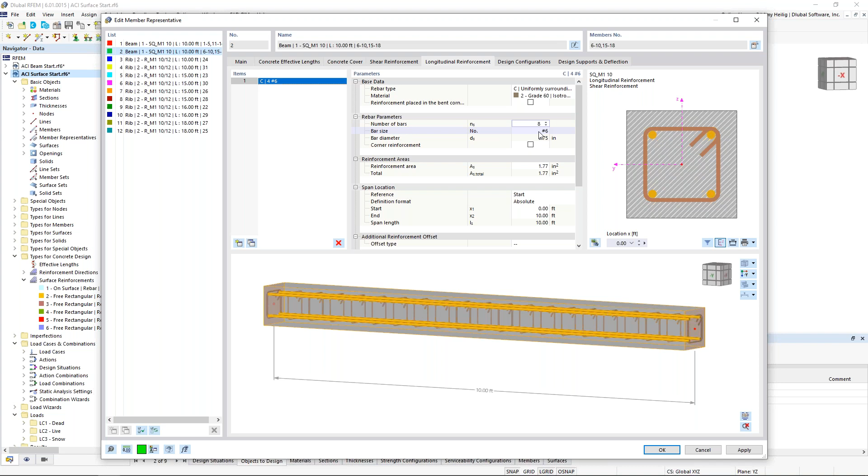The longitudinal reinforcement - we're going to use our drop-down box to choose uniformly surrounding, and we're going to choose 8. Number 6 is here, we can see again the picture updates accordingly. These are applied to the full length of the member. I click OK, and what we should see now is all of our reinforcement for every one of those columns at our second floor.

So now that we have defined the reinforcement for the surface, for this rib element, for the columns, let us move into running the calculation for both the analysis and the design.

So remember, we want to utilize this drop-down box here to visit our concrete design add-on for the input data. LRFD, our factored load combinations, are going to be set according to the strength design. Our unfactored ASD load combinations are set according to the serviceability design.

The objects to design - well, we have a lot of red elements here, and that is simply because we have not defined the design properties. I didn't turn on that checkbox, I didn't set the reinforcement. So therefore, we're going to get errors if we try and design everything within the model.

So rather, let us turn off these checkboxes here, and I'm going to graphically select surface number 19, and then I'm also going to graphically select my rib element here.

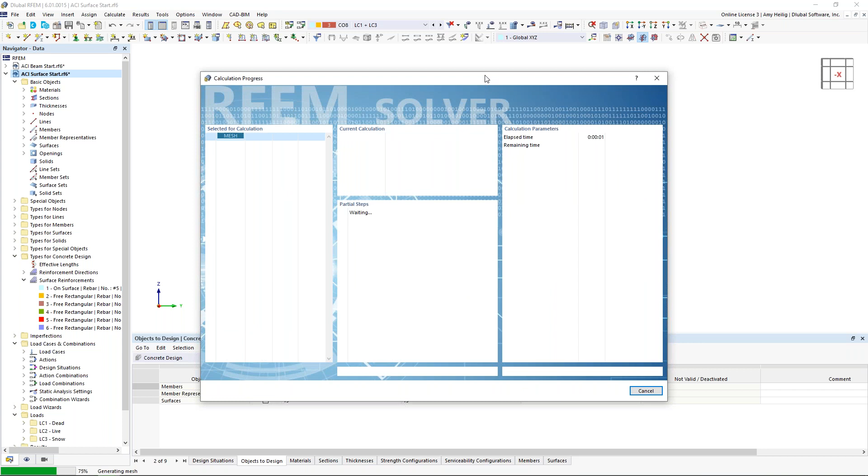And I can also utilize my selection box here to choose all of my columns at the second floor, and I click OK. So now only the relevant members and surfaces will be designed here. The rest of these tabs down at the bottom, we discussed that is just a little bit of repetitive information, nothing to do further, and we will begin the calculation.

So new within RFEM is utilizing the multi-core processor within your computer. Notice that these load combinations, both the factored and the unfactored, are going to solve at the same time, even for these larger models such as this building. Previously in RFEM 5, we had one solve after the other. So these are all complete.

Now notice under the concrete, we have to solve again all of the unfactored load combinations. And the reason for this is, remember, we talked about the effective moment of inertia, I sub E, and that is related to the ACI table 24.2.3.5. The program automatically calculates that stiffness reduction to be considered for the serviceability deflection checks. So that's why we're seeing those load combinations listed again here.

Now, the final progress bar is just going to be showing us how all of this information is compiled into the table format as well as the graphical format here. So this should solve in just a couple more seconds, and we will be back in RFEM with the results.

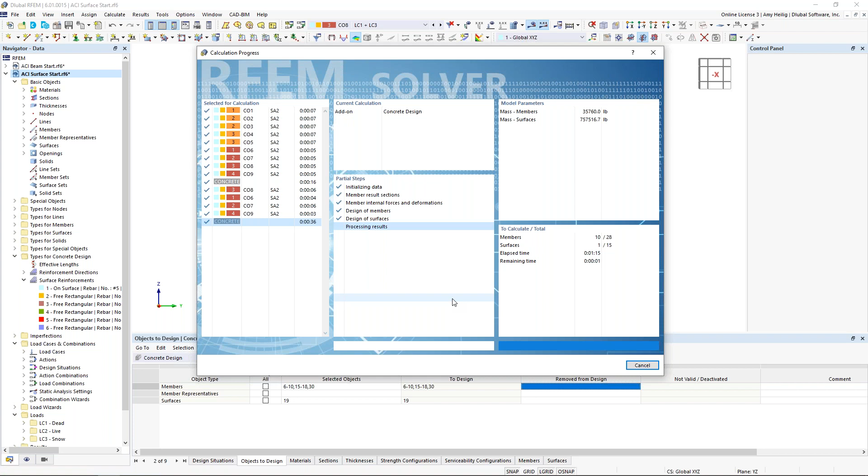Okay, so now that this is complete, what you'll notice here is we are viewing the overview from the concrete design. So any errors, any ratios that are greater than 1, we would see that listed here. So let us jump down to the design ratios on the surface. And it actually doesn't look too bad. Everything looks green except for, of course, the shear resistance.

Inevitably, which I can go ahead and show this to you guys here, the reinforcement on the members is just simply needed for these areas where we have the column intersecting with the slab and at some points where the wall is intersecting as well. So what we'll see listed here otherwise is the design ratios for strength, again, reinforcement limits and serviceability.

Now, for these checks, we can visit the design check details, and similar to what we saw with our member design, it's a similar concept for the surfaces. This one you can see is rather complex, but all of the code references, the equations are listed here. We can also utilize this drop-down box if we want to jump to one of the other design checks here. This one's a little bit more simple, again with the code references given to us on the right-hand side. So very similar, again, to what we saw before with our members.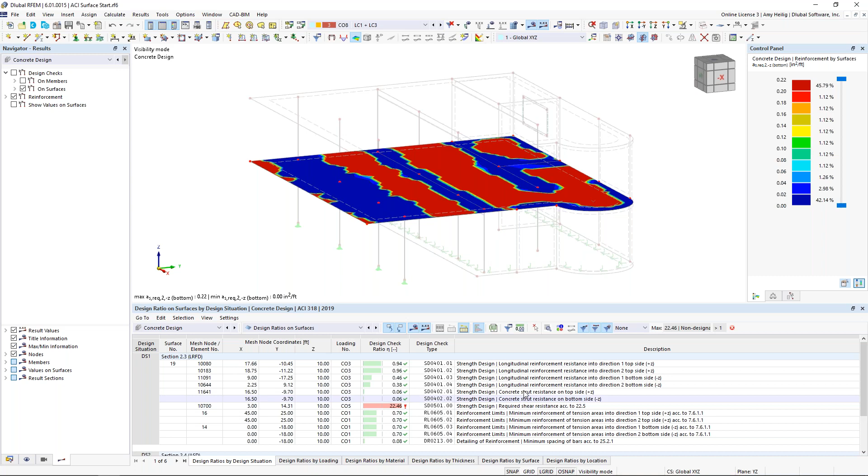Similarly with the members, we have the results available to us in the table format. So let me cancel my visibility mode here. And let us move to our drop-down that shows us the design ratios on the members. So currently we're viewing this tab, design ratios by member.

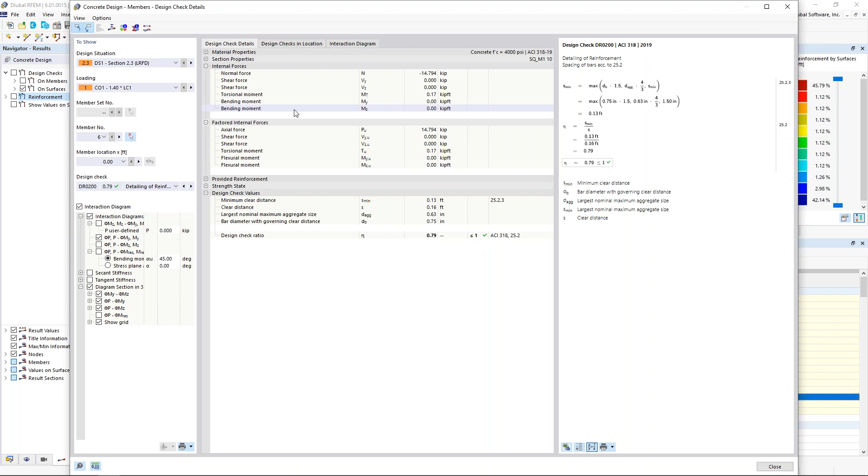Notice that when I click in here, we're shown exactly where that controlling internal force is for this particular column. I'm not going to spend too much time going over the results because we've already seen this with example 1, but with our columns, what might be interesting to us is this new feature here within RFEM 6 for our interaction diagram. So this was long awaited and we're very happy to present this now because we will see the interaction diagram available to us with this new tab and the 3D view here.

So we can view all of the values within table format, but we can also see where exactly we land within this interaction diagram for this particular member at this X location. We can add this information to our printout report, so very powerful there as well. And of course, we have our design check ratios, our reinforcement that can all be shown graphically for the members that we covered in the first example.

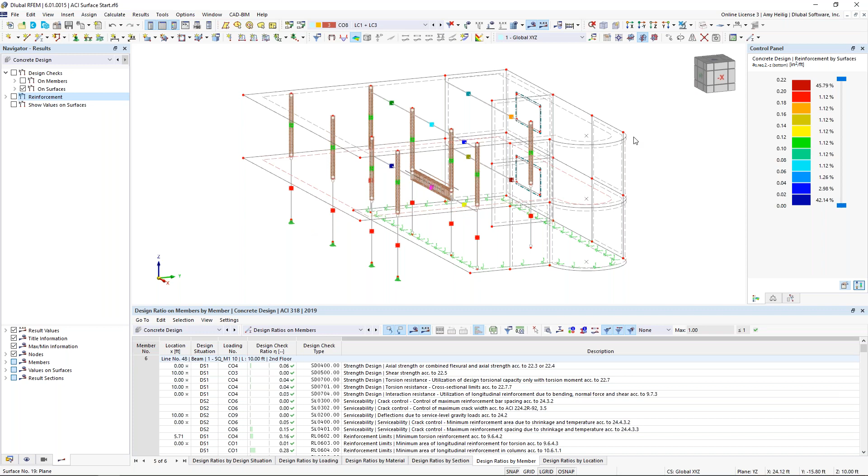So the final thing to cover is just a quick few options with the printout report. So what I'll do is create a visibility here for my surface, and I want to hide these hidden objects in the background. I'm also going to adjust my view to the reverse Z direction. For my reinforcement, I want to show all 4 of these options here for the required reinforcement in my printout report.

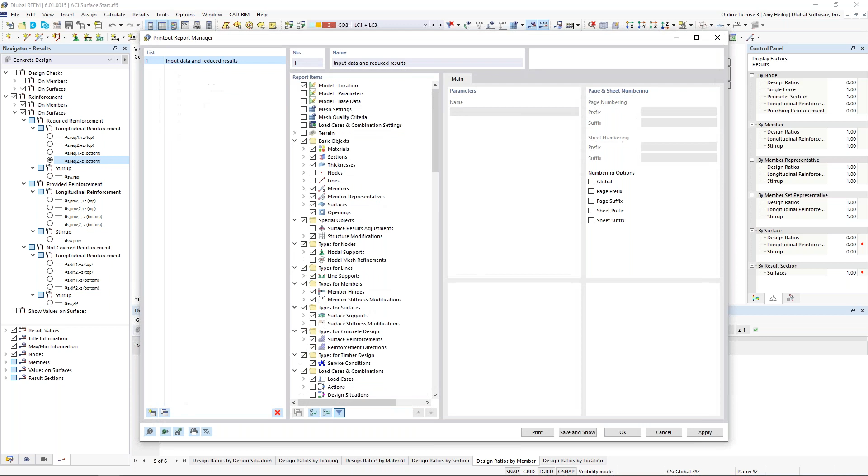So the first thing I'll need to do is actually generate the printout report itself. Up here in our toolbar, we can choose New Printout Report, and we can see all of the various settings we can turn on and off within the model. Now, we also have some saved templates here, so you can load one of those saved templates or create your own template. We'll go ahead and work with template number 1, input data and reduced results. So I click OK, I click OK once again. So that printout report is now created in the background.

For my graphics, I'm going to choose my drop-down option here to print the graphics to the printout report. And what we'll notice is that I can set this to the full page height, and I've set this to the window filling so that it is nice and zoomed in here. And I don't want to just print this view here, but I want to take advantage of what's called the multi-print. So when I select this option, I now can visit this tab up here for my concrete add-on.

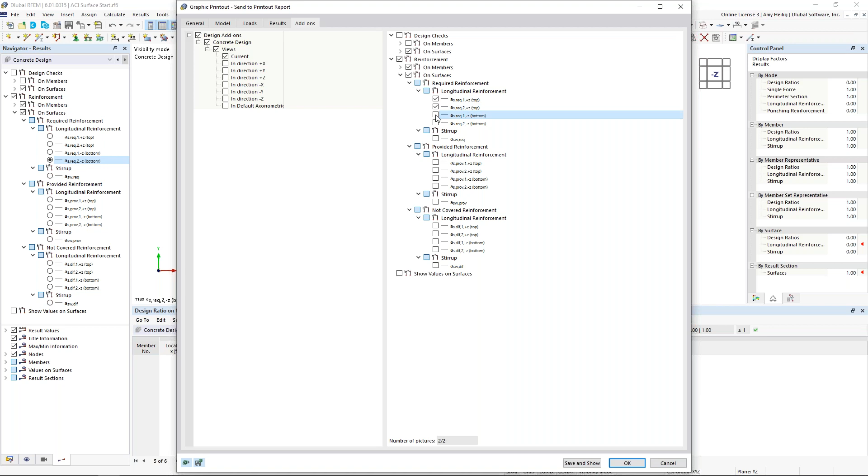Now, all of the various options available to me here is exactly what we have available in RFEM that we covered. So what I'd like to do is activate for my printout the required reinforcement in both directions for the top and the bottom. So I click OK, and then what I should see down in the lower left-hand corner is the progress bar that has now added that to the printout report.

So if I go back to my navigator here, I can find that printout report available to me. I can double click on it, and it should go ahead and compile all of those results. We can see our progress bar here to open up the printout report in a separate application. So we can see that application load, and I'm going to collapse our report navigator chapters just so it's a little less overwhelming on the left-hand side.

But this is going to show us, and I can zoom in here, all of the input data, including the results for our structure. Down here at the bottom are those 4 pictures that I just printed off based on that multi-print option. Now, what's really powerful is that if I make any changes to this model, the program will automatically update these pictures, so we don't need to go in and print them again.

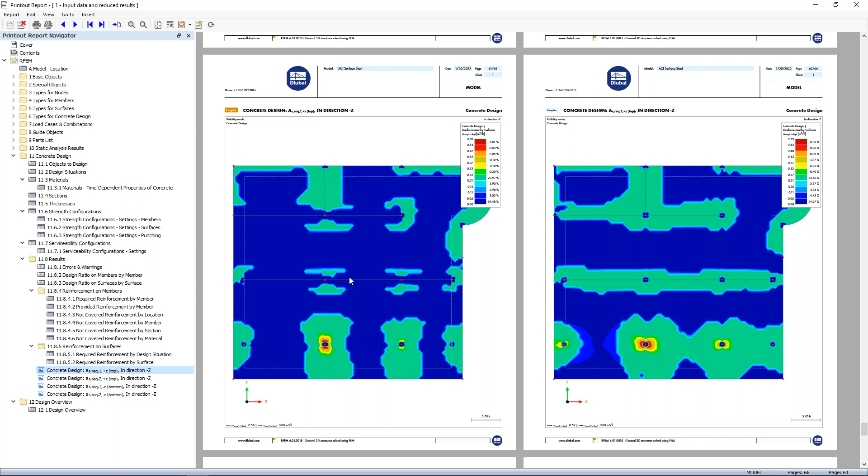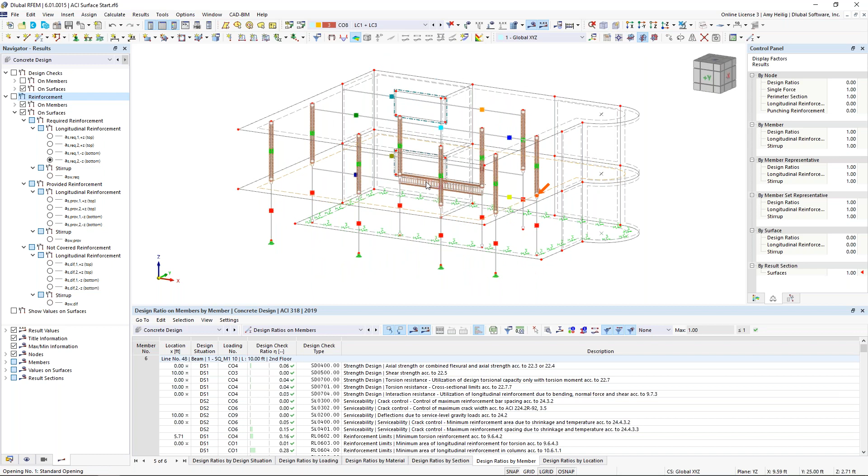So once these pictures have been defined, what I can do here is just drag this printout report to my other monitor, because we can work concurrently in the program at the same time. So let me cancel out this visibility mode, and I'm going to go back to my results here, turn off my surface, and select only my rib member, and I'll create a visibility by the selected objects. Additionally, I'm going to turn off that member reinforcement here, and we will choose our view in the Y direction, so just a simple wireframe view of that member.

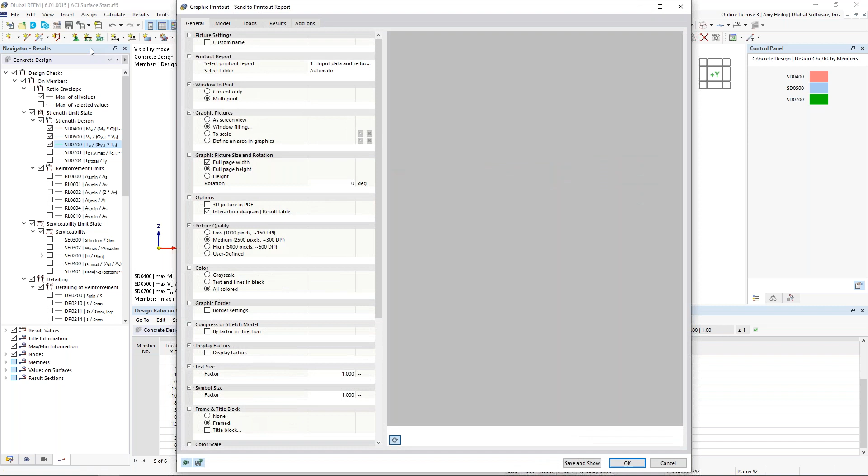Well, back under my results, I'm going to take a look at the design check ratios for this member. And I don't want the max, but rather I'm going to overlay here several of the design checks. And you can see again, these color codings will show me exactly which design check ratios I'm looking at. So let us print this off to our printout report as well. So I go up here to choose print graphics to printout report, and this time though, we want to view the current view only. And I want to also modify this to not the full page height, but we'll choose 50% of the height.

So once I have these settings correct, I click OK. And what I'll do is drag this printout report over to the monitor so that you all can see it too. And we now have this picture automatically added to the printout report.

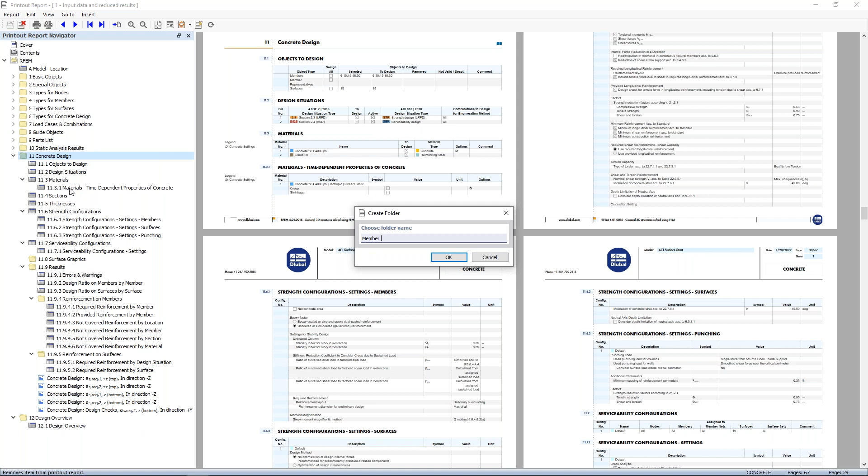Now we also can right click on any one of these folders to create a child folder. So perhaps we want to rename this to surface graphics for a little bit better organization. I can right click under concrete design, create child folder again. We'll call this member graphics. I click OK, and I can use my shift key to select all 4 of my surface options here.

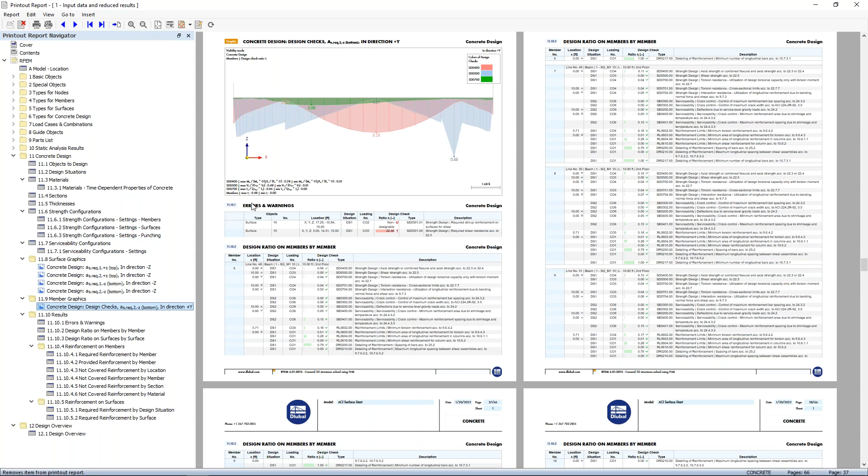I can drag and drop them into that new child folder, and the report will automatically update. For that rib picture, I can drag and drop that one into member graphics, and we can see here it's now added to that portion of the printout report.

All of this information you can edit, including the logo, the cover page. We can modify this cover picture. Once you have the information set the way you like it, definitely save it as a template, and you can use that for any future models within RFEM. So extremely powerful printout report. We did a lot of great changes with this new version. So certainly take a look at this.

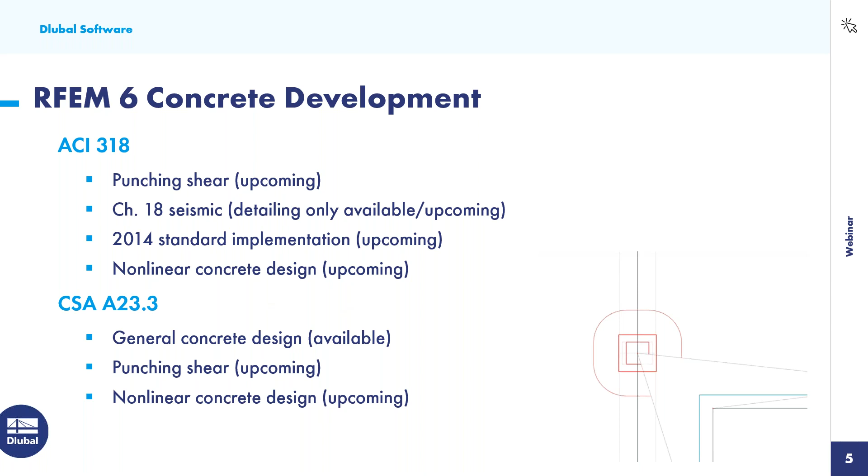CSA A23.3, everything that you saw today is also available for the Canadian standards. It's an identical workflow, we're just doing the design according to the CSA. The punching shear, that should also be available soon according to the Canadian standards, and nonlinear concrete design as well. So these are just some developments in the near future. Of course, we have longer term developments as well that are just a little bit further off.